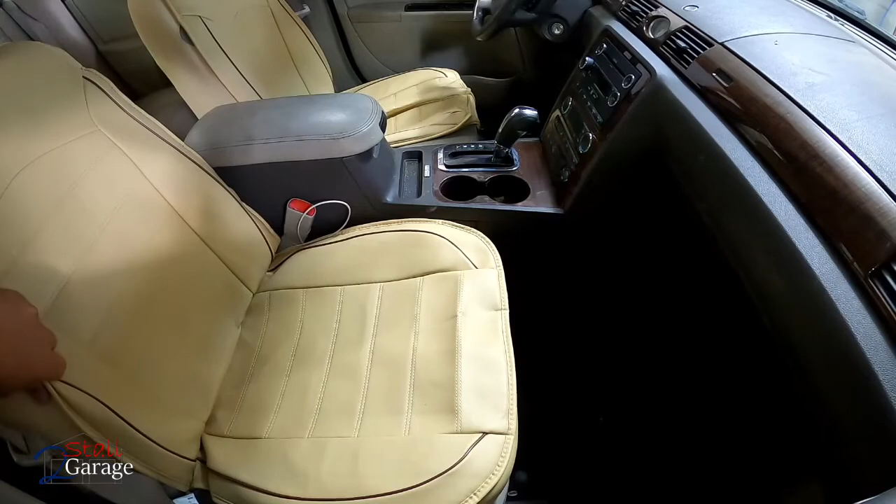The problem with these, we did a video on them and you know, they seem to be okay. They're kind of a really nice material, but they just come right off of the seat. This one here isn't anchored, that one is anchored over there, and look how it's peeling right off.

So we resorted to going to the junkyard, and guess what, we paid $63 for the seat covers in there. And for both front seat covers with heating elements, bottom and back side, we paid $14 and a little bit of change.

Well, as you've seen from the list, we got quite a bit to get done, so we're gonna get right to it. You wanna go in there, buddy? You can, here, I'll leave this back door open for you.

There you go. I was gonna do some painting on the three-wheeler. We're actually gonna do the rack here very shortly, but there's so many flies in here. I've got a zapper set up over there. And there's one, they're all over the place, more of them. So I can't paint right now. Hopefully after tonight we'll be good to go.

Let's go ahead and get the battery disconnected since we're gonna be working with the electronics a little bit under the seat. What am I doing, losing my marbles here. Battery disconnected, stay.

Pretty clean motor, clean engine bay, 225,000 miles right now, I think. Moose, I think we're gonna close this for you, okay? You can come out this side if you need to.

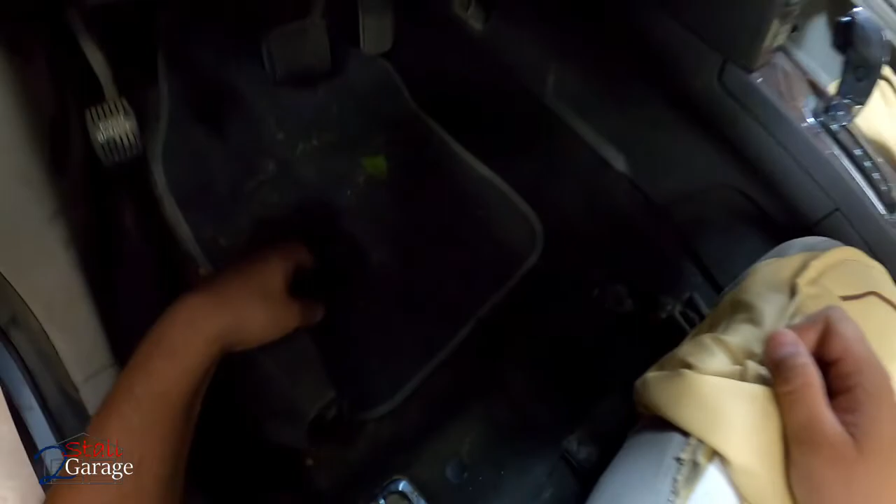Well, as you can see, it just kind of comes right off. Let's start off by taking these covers off. That one wasn't held on much, or very well. Two. Moose, maybe you'd like these seat covers, huh? These flies all getting in here.

One right there, one right here. Two, just keep these together. Let's leave this connected until we get the seats out.

At least undone. You guys probably can't tell, but the flies are all over me right now. Silly things. I think they're coming out a hole right here. It's a busted board, add that to the list of things to fix.

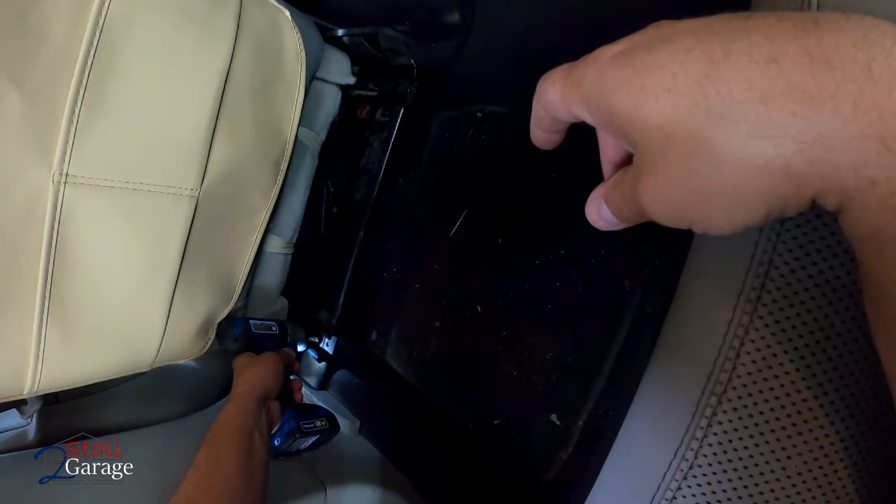One, two, leave those right there. Freed up, let's go to the other side. We'll get these first, these just kind of pull back. Separate a little bit.

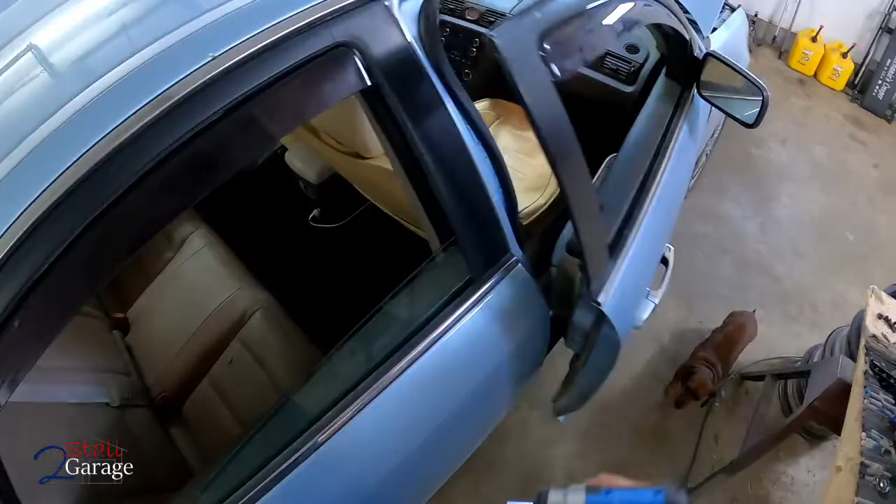One, two, forward motion. You fly, another one. This seat's got a little rip right here, but I think we're gonna try to repair that.

One, two, there we go. Garbage, there's a chip, Moose. You want it? No, Moose doesn't want it. You know it's bad. All right, now I don't know that we need to do this.

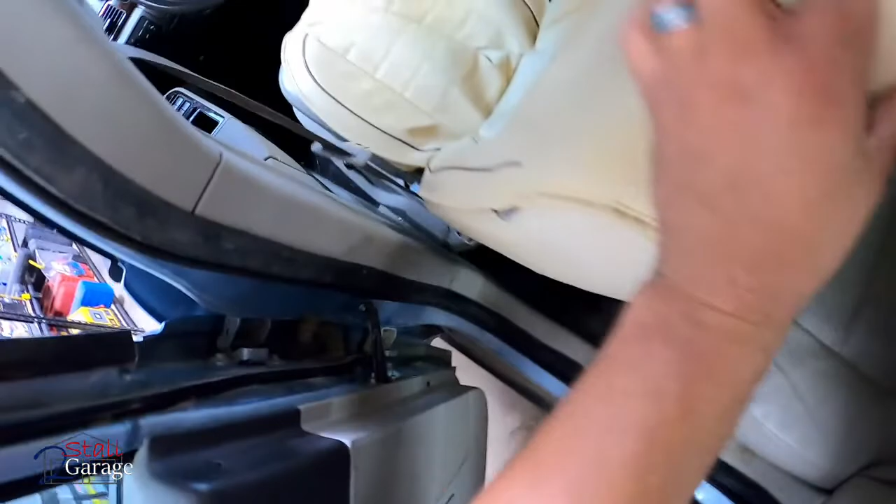But why not, we'll disconnect it. Looks like there's a pretzel down there if anybody wants it. Come on out, there we go. Lean it back, I think it's gonna have to come out this back door.

All right, so I lift this up, we got a gray plastic holder. Kind of pushes it all out right there for you. There's our big connector, there's one more little one back here.

Got that out, and now I think we're good. What's this? Phone charger. Let's make it easier, I'm gonna try to take it out the front way.

Get this out without scratching up your car door or someone else's car door. Maybe that's even more important.

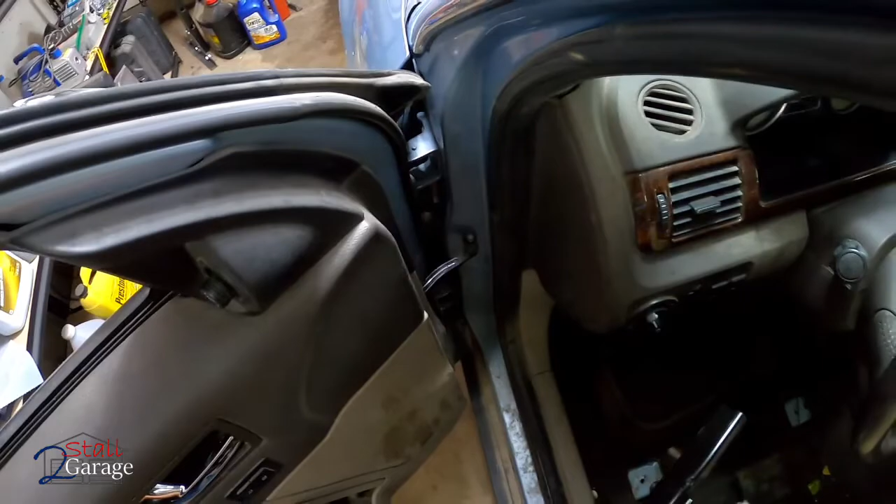Oh, that's what we forgot. One thing you gotta do is get the seat belt off. Forgot about that, let's do that. This slides up.

Fly. See if I can get it to slide up for us. Do it. There it comes, slides right up and out.

Maybe a 13 in there again. 13 or 14, what do you think? We're gonna stay with 13.

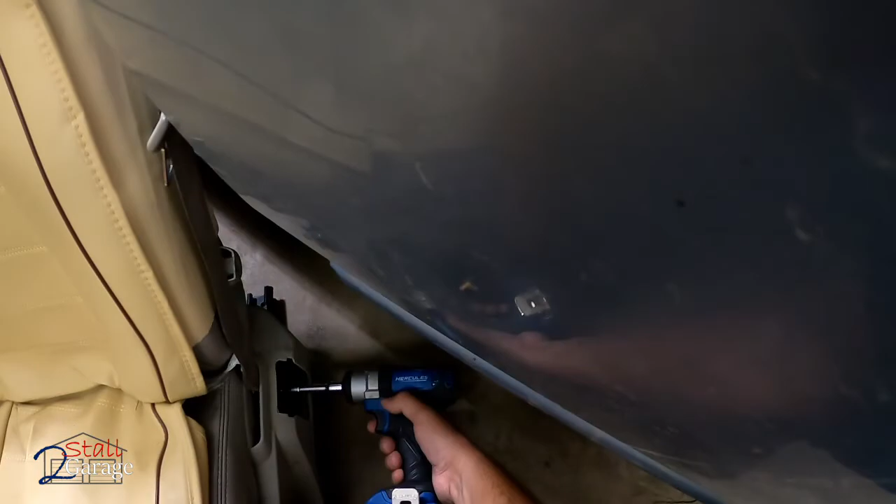Catch them, buddy, you gotta get them. They're everywhere, these flies, can't paint if I wanted to, which I do want to. Look at that, it's a 14. A little bit of a struggle bus at the moment, but it'll be okay.

This will be overkill, but we don't have a socket that's deep well on a 3/8 inch, so we're gonna have to go with the big gun.

All right, so that'll just come right off, slide out, slide up. We'll put our nut back on. There we go, put that back inside.

Stay. A little bit of a tight space in here, but not too bad. Hey, Mooser, see if we can get this on its back.

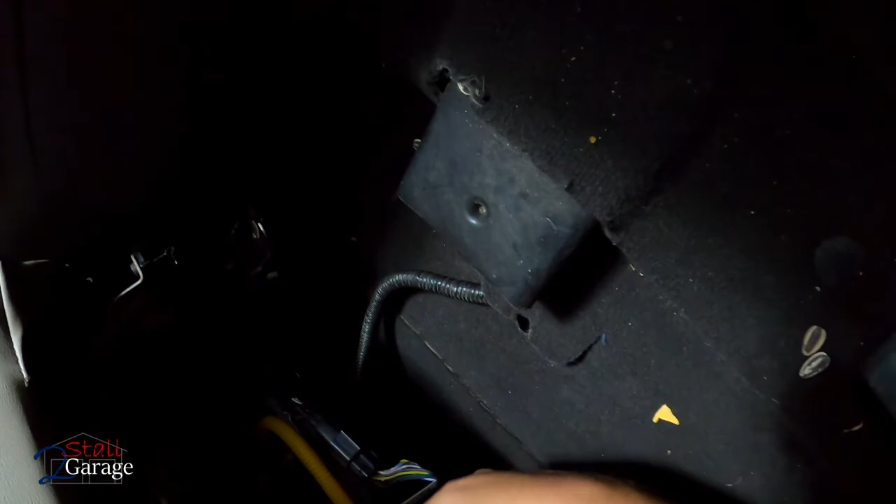There we go, you guys might be upside down, I'm not sure. This side doesn't have the same connections. Take note of that. There's another connection right underneath this gray connection right here. There's that. Got a little holder down here.

There we go, we're free. Seat belt come out. There we go, this actually has a sensor right here. If these go bad, you get an airbag light, not an engine light. So got that disconnected, got it out. There we go, it's hot, 2 air conditioners running, it's hot outside.

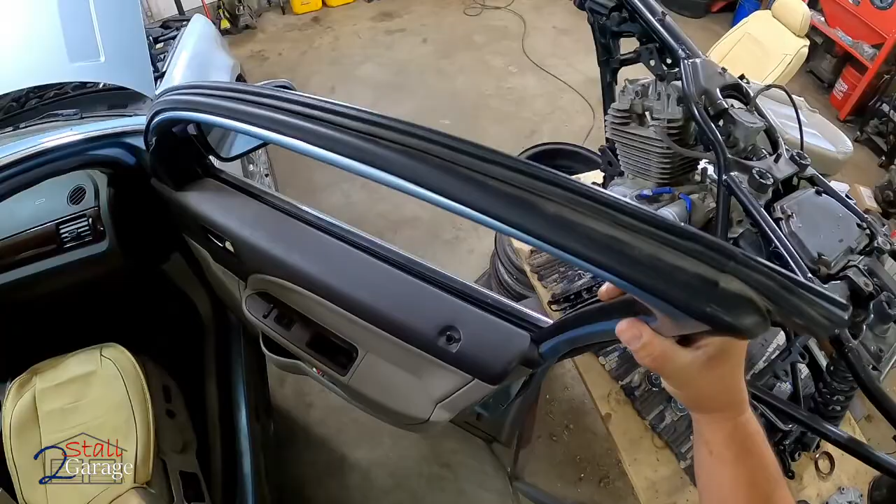All right, this is gonna be a little tighter fit. Maybe we'll try to pull it up. There we go, it's a tight fit. Seats out, connections out. This doesn't need to be in here.

All right, so there we are. We've got the passenger seat, we got the driver's seat. You can see where this is not secured down. You can see where it is, yet the sides still come up. So it's a little bit problematic.

Got a rip in this seat right here. Cushion's good. We're gonna do some flipping and flopping here, see what we're working with here. There we go, that's 1, 2.

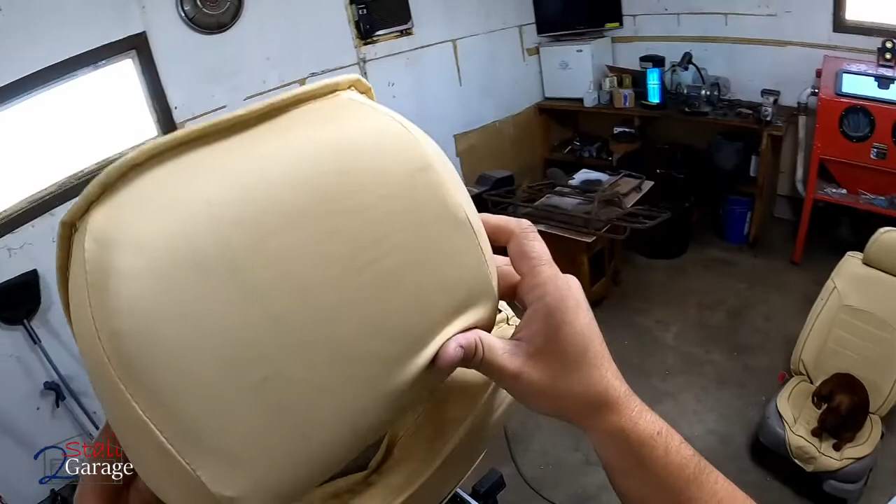Hey, there's one part done. Let's put this right in the car. And unfortunately, it kind of is what it is. Garbage time.

Nice idea, maybe a worst case scenario. I don't know what else I'd use this for. Almost like I should keep it for a seat cover. I think I could use this to recover a seat. Not that seat, obviously, but maybe like a 3-wheeler seat. Now we're just gonna toss it.

Clip. 1, it's got a little connection down here for our power seat controls. That's off. Should be another clip under here, I think. Yeah.

Can you get it without breaking it? Let's try. Get it? Got it, good. And let's see what we got right back here.

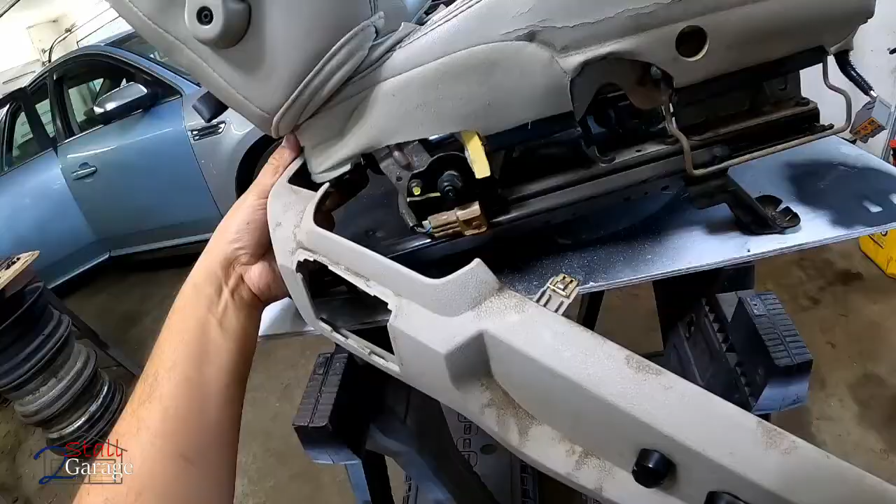Right down here, there's a Phillips, let's get that out. Itty bitty? No? There's one, you feel it? Right here. Maybe. Hey, Moose. Hey, hey.

Look at all those flies by him. 1, 2, 3, 4, 5, 6, 7, 8. I know, crazy, huh?

All right, that's off. We're gonna do one seat at a time, so I'll just put that right there. This clip was already off. Grab yourself a screwdriver. Off.

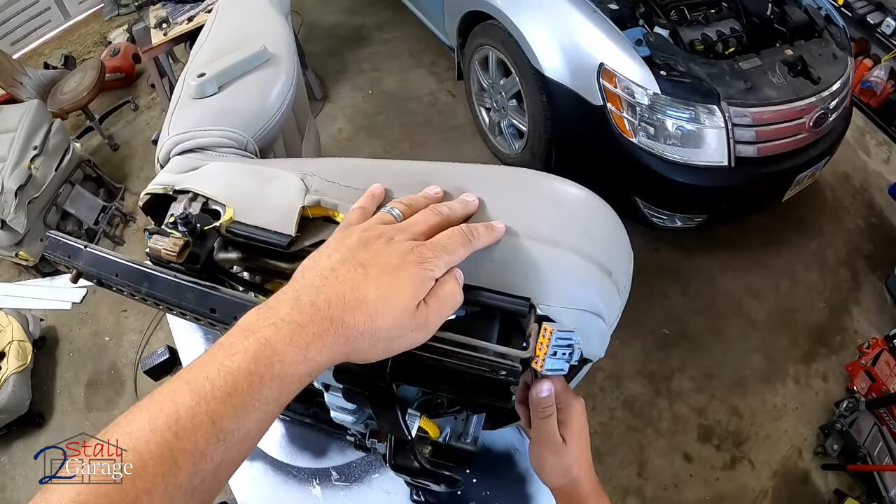Get this one. So as you can see, as I take them off, this is how you're gonna put the other one back on too. Then go right through this little hole here. Look at that, 2. Can I go through this hole now? No. Can I? Yeah, sure can.

All right, there's the third. We got another one on this side. Let's flip it around, it's starting to come off here. It's good, good stuff.

Done, this one's a little bit harder to get to. Suppose we could take off the motor, but yeah, it's just a little clip. All right, now we'll see if it comes off. You ready? Oh, right here there's gonna be some clips. Let's see if we can take a look at those. Yeah, there's one, looks like it just separate.

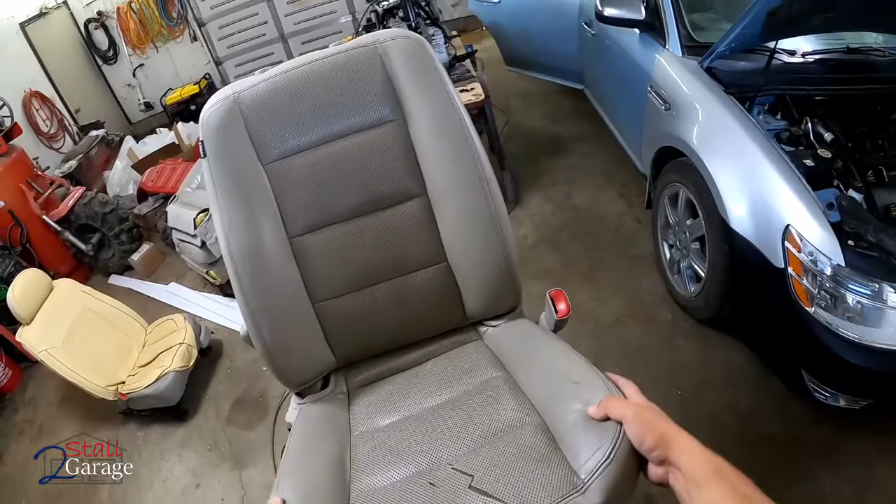One thing at a time, if you got a big list, we are not going to dispose of this foam. I think what we'll try to do is maybe see if anybody else needs the foam and get rid of it for cheap.

Looks like we've got the heated seat element under here holding on. Here it is right here coming out. And it's right here, there you go. Now we should just be able to slide it right through. Should come out.

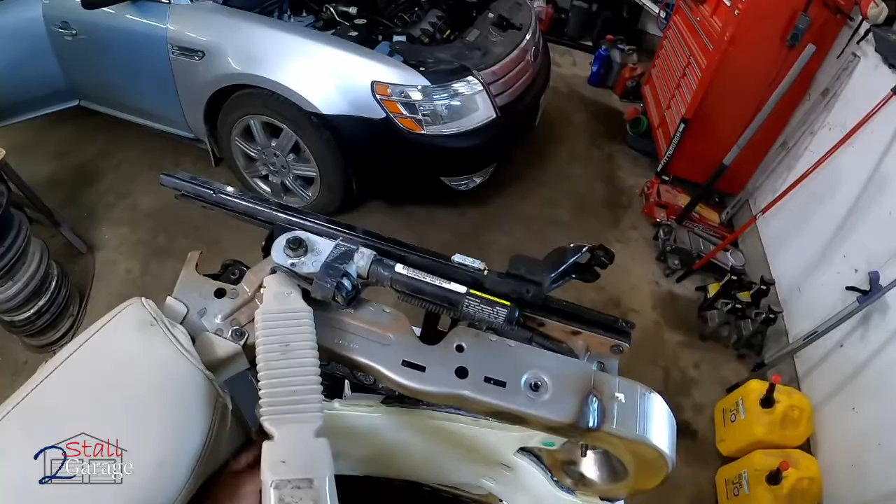So your heated seat element, here's your harness, and it is just right underneath. Just in case you're wondering, if I were to peel this back, it's gonna be right here, this white pad. But I'm not gonna peel it back, I'm gonna put it back on.

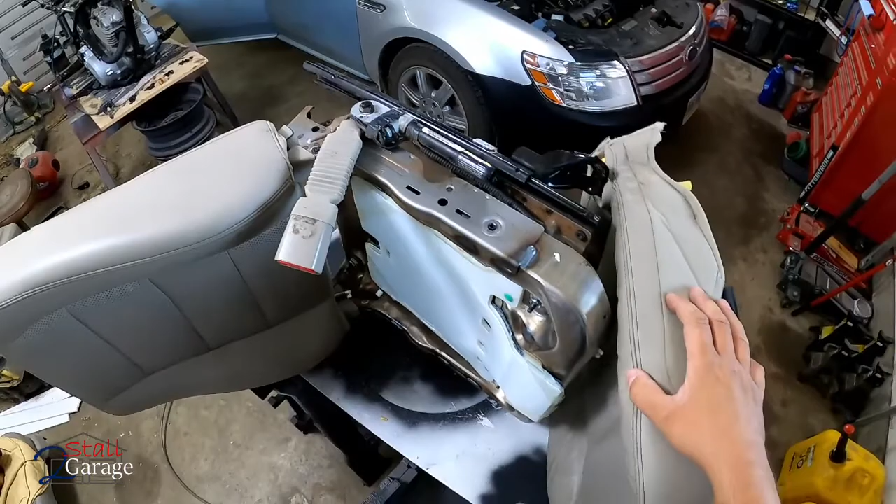There we go, I bet this is your airbag sensor, your pressure sensor. Some of you just said, yep, that's what it is. So here's gonna be your difference. Cracked up right here.

This is gonna be about $250 on eBay if you find one. The heated seat element alone is gonna be about $52, $54 with tax. So you're talking over $300, hopefully no shipping, to get the cover and the heated seat element. Doesn't include the foam if you need foam.

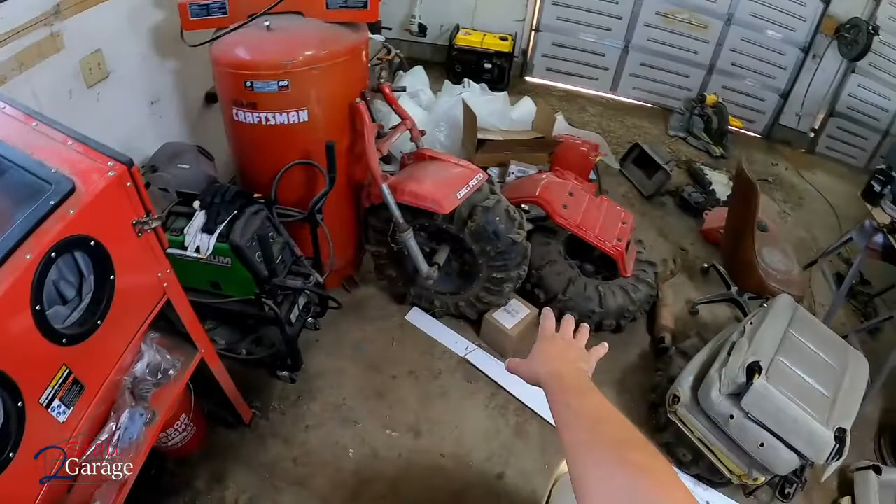Oh, I think it might have went. Boy, I just don't know. I think it came right through that spot right here. We'll try it out.

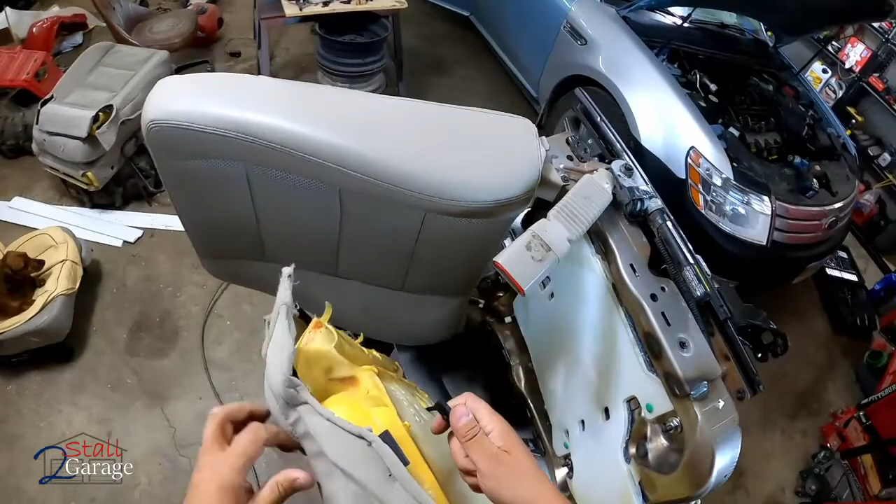Yeah, it lines up right there. So that's gonna be where we drop it in. We'll go ahead and connect it right up. There we go, and fasten it in there. Very good.

There we go. And make sure we line up. Give it a nice tug or two. You guys upside down just for a second. Oh man, is that gonna work? We'll line it up as we go.

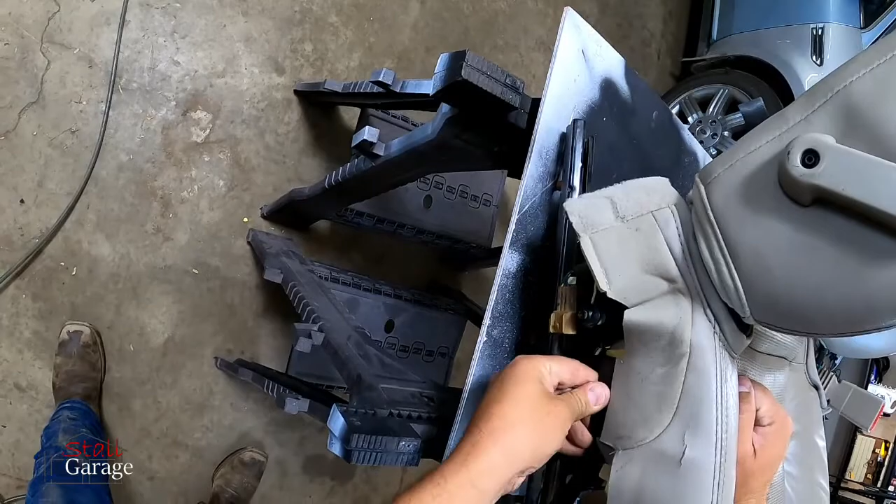What's this? Look at that. A little bit of cracking right here, but hey, it's from a junkyard. This is the part that you see. Okay, so this just comes this way.

All right, we're lined up here, lined up there. Let's get our front clipped in. I'll flip it over so we can do that without pinching the fingers, maybe.

All right, GoPro battery went dead. We got the front just about clipped in here. A bunch of different flies are hanging out watching the progress.

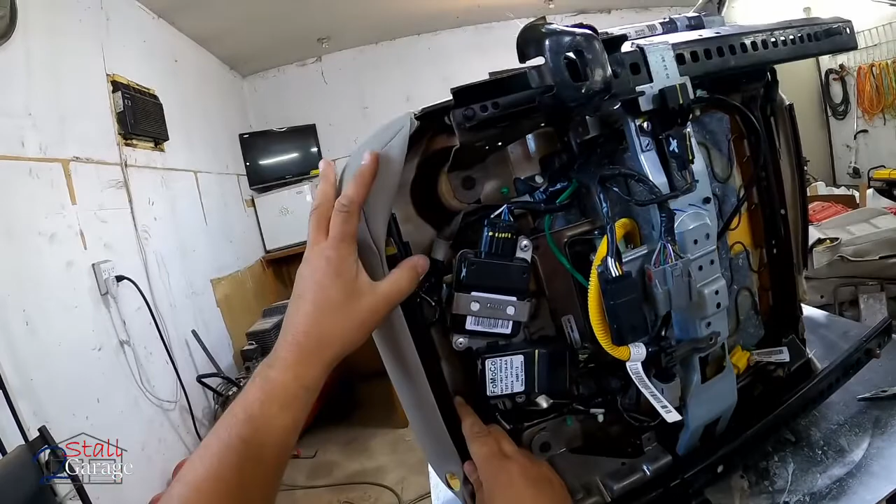Then you're gonna have to see about sliding this up just a little bit. Do it, there we go. Now we're in the middle. Small clip. See if we can get that on. There we go, it's gonna look good.

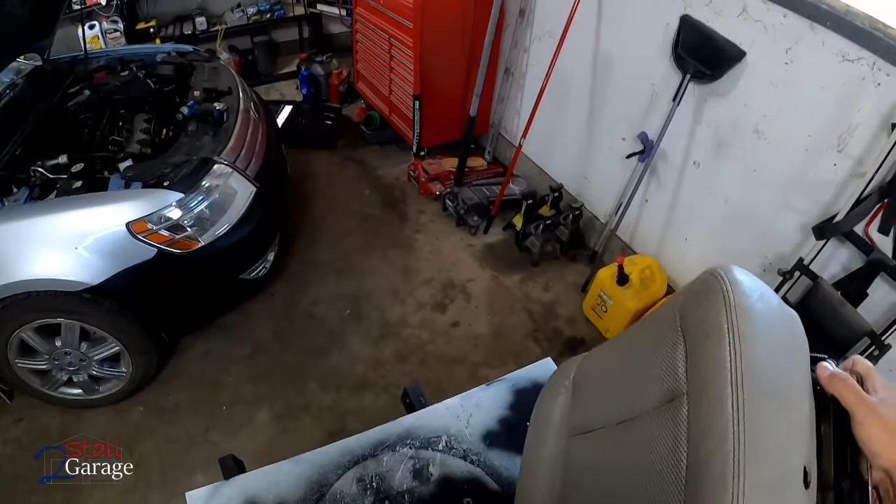I'm actually gonna flip it on its face here. Maybe we can get away with it just being like this. Let's see, all you're gonna do is try to snap these together. They came apart pretty easy, and you hope they go back together easy. And once they clip, you slide them, basically aligning them. Looks like it'll be kind of fun.

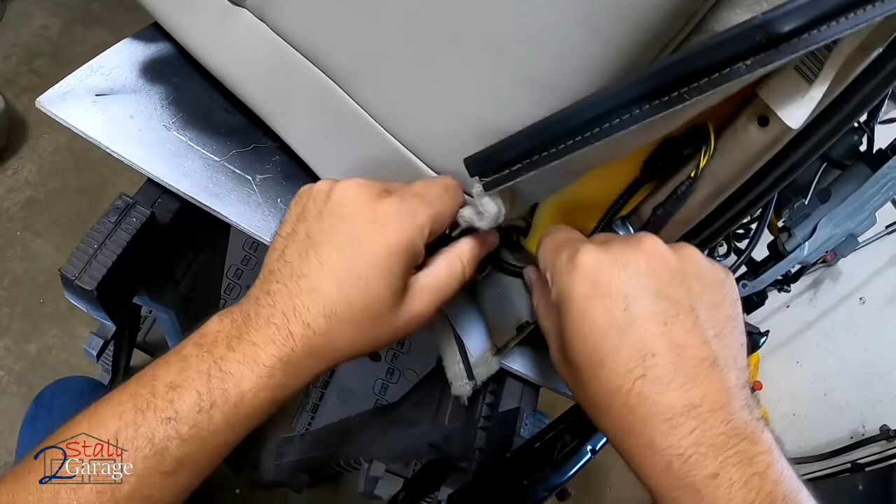Look at that, let's get this to go up here. There we go, I think that's in. Let's go for the bottom side now. You guys remember if this was covered or not? I think it is, yeah. This one's gonna be a little tighter.

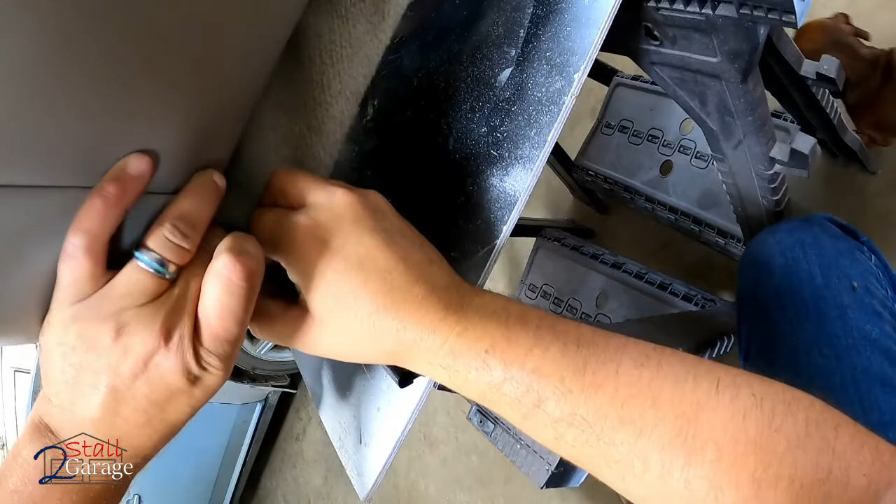We'll put this on first. Click, click, give it a nice tug. And then brace yourself. Did you get it, Moose? I don't think you did. See if we can get us just a tiny bit of slack by working it around here just a little bit.

Maybe. Boy, that is nice finger pressure. We got a click. Whew, get it? Let's make sure. Okay, let's go back a little. Look at that, it's on. Good job, oy vey.

Just like that, do a little leather conditioning. Got a nice bottom to match the back.

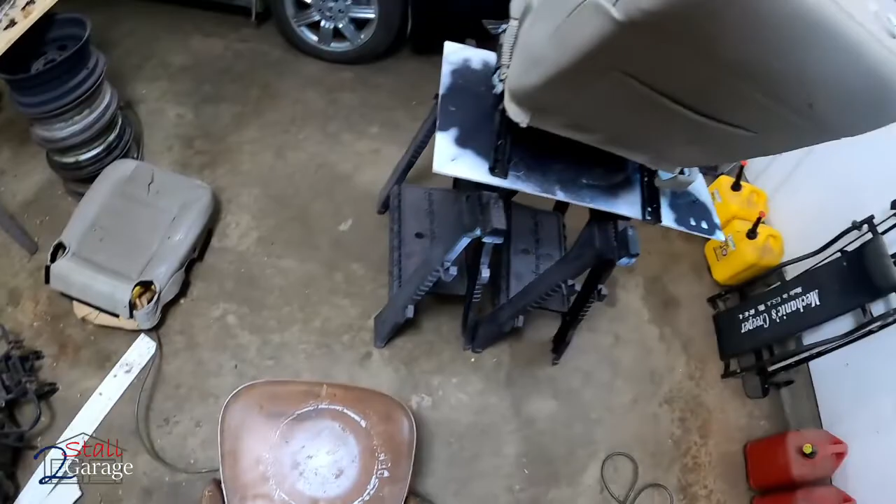Let's get this side on. Hey Mooser, I'm gonna sit down, is that okay? Holy cats, you got that thing dirty. Good thing we're getting rid of it. You got your couple clips in here.

We'll connect our fastener, see if we can get this to go on. 1, 2. Where's that? Oh, 3, get that click. We're good. Oh, another clip here. Oh, we have just got our little Phillips now.

About 20 flies in there. It's still hot outside, but they're making mad dashes for the inside already.

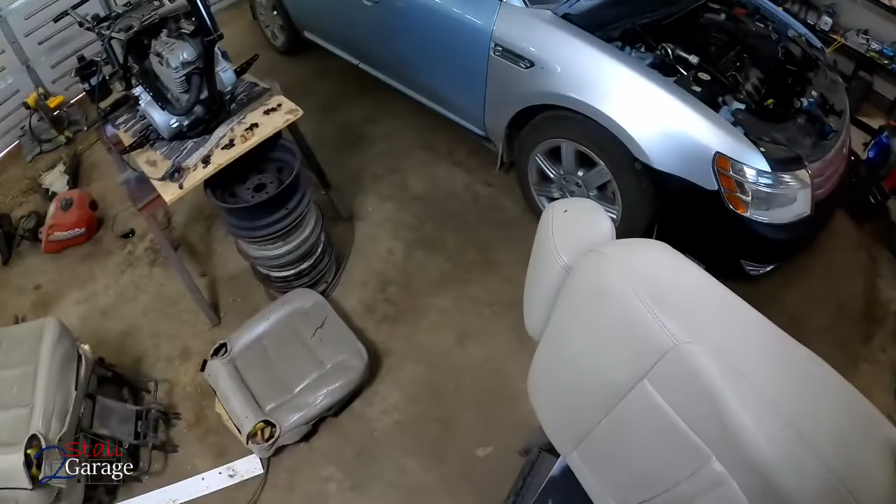Got these Mopar rally wheels to paint. These are from '71, they go on a Dodge Demon or a Dodge Dart. These are the small bolt pattern. This one was blasted on the front and back. Painted the back side of it. The front side needs to be painted the gray.

And then these are up to get blasted next and painted, but they've been sitting a while, and I don't think we can paint anything with all these flies in here, buddy.

This is gonna go right here. Hopefully you can see it. I don't know, does it go right there? Oh, it goes right here. You got these little tabs where your seats fit into, so you can't make a mistake when you're lining them up when you put them back in. What's this for?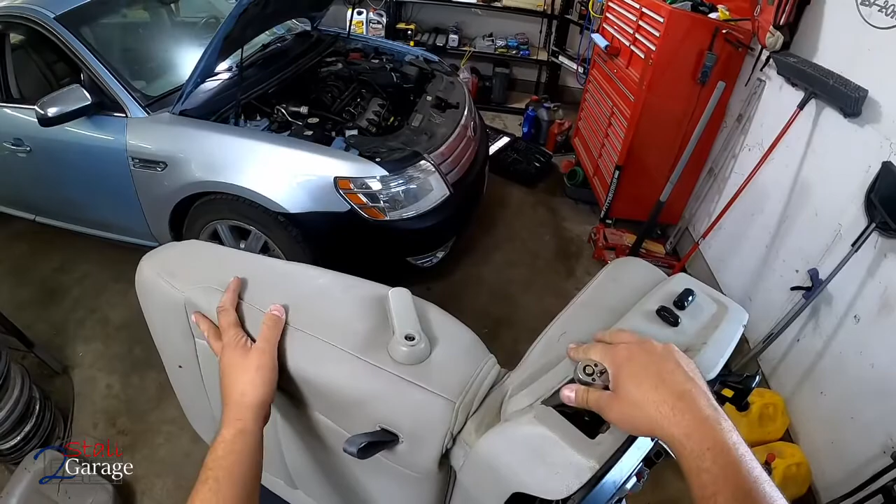Ah, it's to pull it to get out. Must be, huh? I don't really know. Okay, so this is what it looks like. Everything looks very nice on this. So that go down a little further. There we go.

Seat belt's gonna attach here. Put that cover on afterwards, and we are ready to go with this.

I'm gonna do the next seat, and then we'll fast forward to when that's done and we're putting them back in the vehicle. All right, at this point in time, I've got the passenger side seat in.

You can see here, the top had a little rip in it. The bottom had a little rip in it. Was that the case? No, correction. Just the bottom had those couple tears in there. It's the next day, so I forgot. Anyways, top's still good. This is the top that came with the car.

Got it quite a bit forward. It's all bolted down, the battery's out again. Everything looks good, needs to be cleaned up a little bit.

Hey, Mooser. This is the big part right here, the big change. This was the bottom. This is now the bottom. This foam's still gonna be pretty good. Could definitely be used again.

That top part was an extra. Might save that. See if I can get it to somebody who needs it.

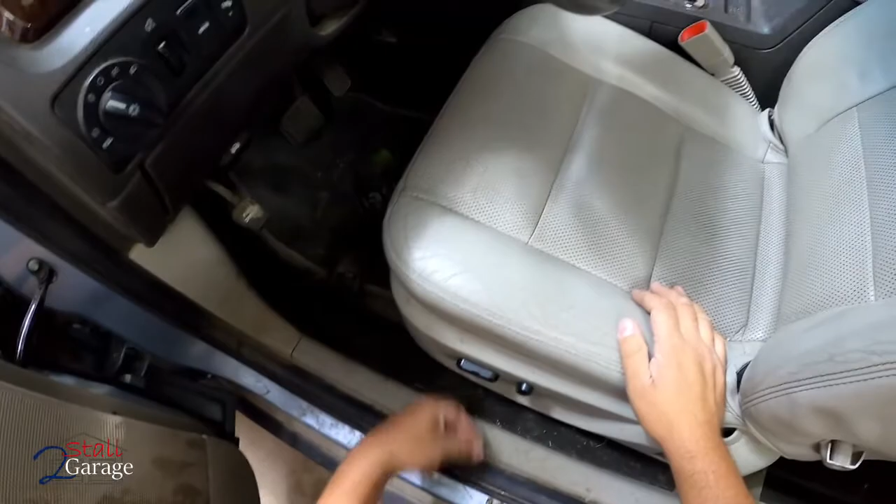I'm gonna go ahead and put the 13s in, not gonna tighten them all the way down. I tightened them all the way down on the last one and it caused a problem when I was trying to get the front ones fastened in. There we go.

Let's connect the battery up so we can move that seat. Kind of a little bit of a process. While we got this forward, let's put our seat belt connector on.

Moose loves riding in these back windows, don't you, buddy? You should do. All right, let's see if it returns. We're gonna go number 2.

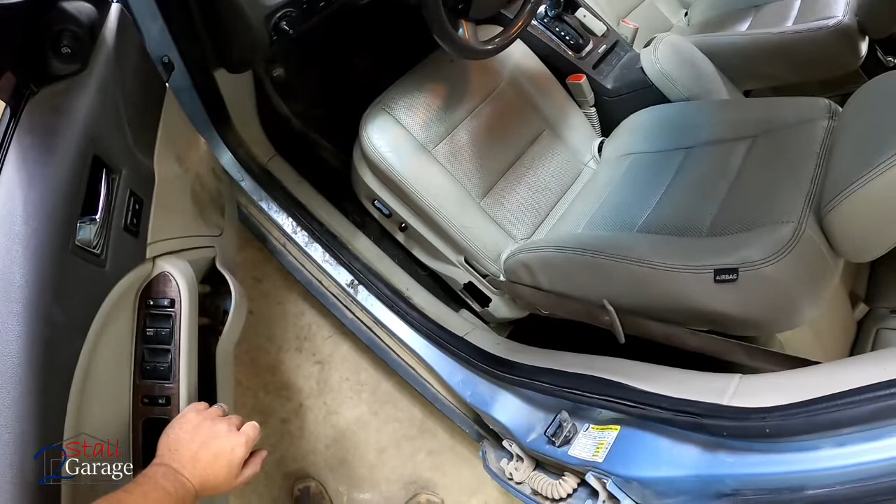I must be number 2, huh? Nope, I am number 1.

All right, now we're just gonna put this trim on. See, this one's a little bit busted right here. Thankfully, we got 3 other sliders. Put it up to it, click.

Let's move this one back. I think we're gonna take this on a trip tomorrow. Probably about a 4-hour one-way trip. It'll be nice having some seats.

So there they are for $14. What a difference it makes.

This is what we started with, just for the driver's seat. Top of the driver's seat was all ripped up too.

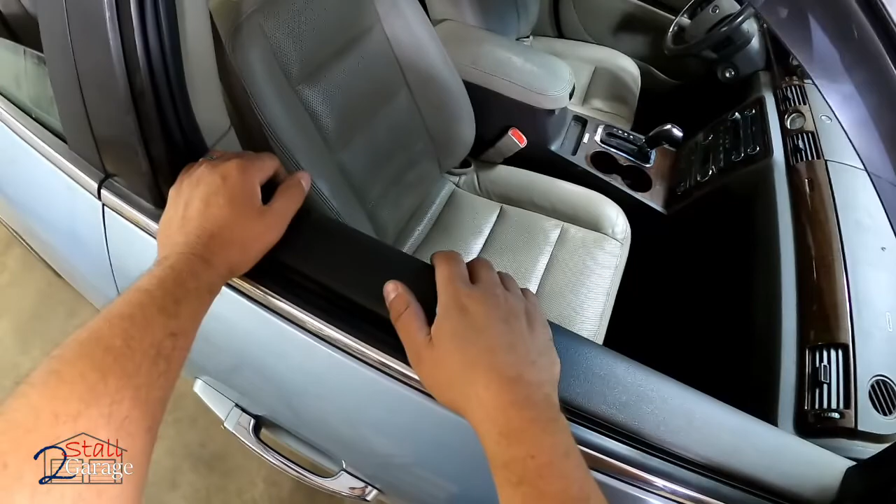This is a spare. Leather's in good shape still. $14. We went to the local junkyard. They've got a book with all the set prices and seat covers. I think they're $4 or $5 a piece. And for those luxury seat covers on eBay, I paid $52 and some change. And it's just unreal. We've got OEM seats right here.

Let's cross that off the list. Seats done. All right, I took the car outside now. We're gonna check the AC on it. Normally I'd use this gauge set right here, but I don't know where my can tap went.

Is this it? Nope. Goofy, I had this right here. I don't know where the can tap went. So I'm gonna have to use this one instead. Not a huge deal, we're just adding. I don't know that it has a leak in it. I have not vacuum checked it.

It's just kind of been this way since we've purchased it. Cool is nice going down the road, but as soon as you're idling, it struggles.

Come on, Moose, we're not staying in there. Come on.

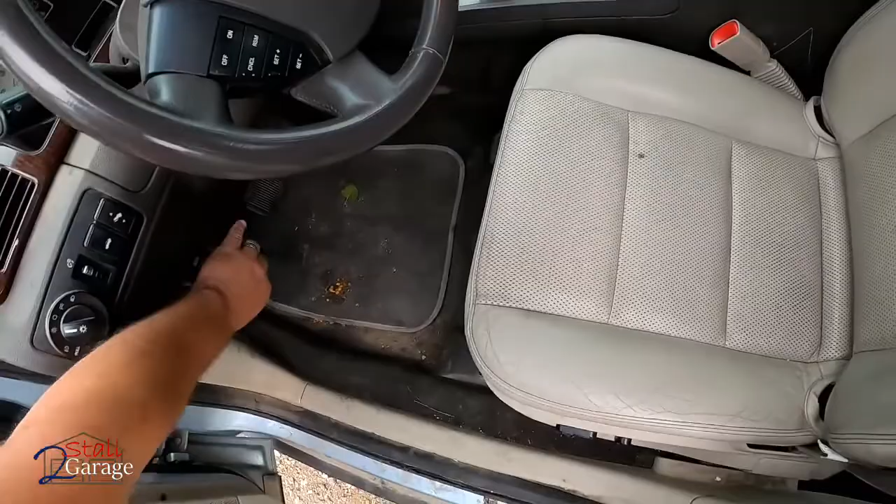Let's go all the way down. Recirculate. Turn it on high. Okay, so right now it's about 70 degrees outside. Can't believe it's this cool.

We're gonna use this one over here. It's working pretty good right now, about 48, 47. What are we coming in over here? 47, 43, 44, 45, 48, and of course that's the far vent, so that's understandable.

Come on, Moose, come. Hey, Crystal.

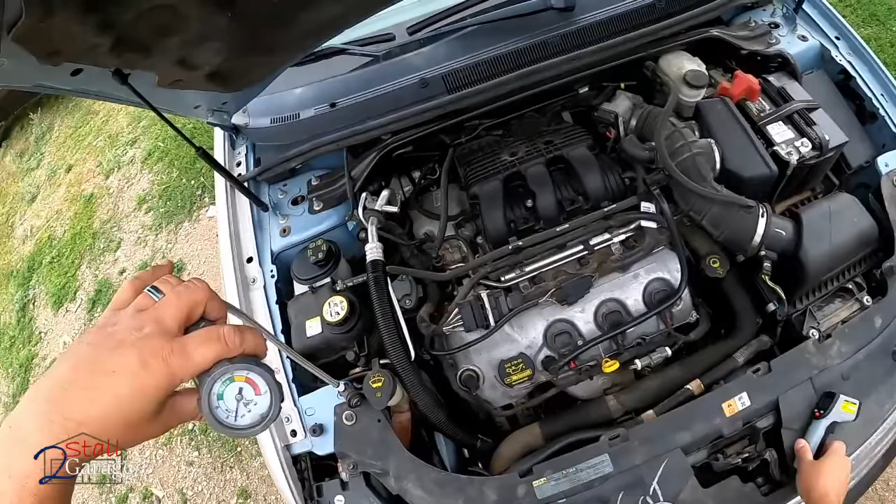Hey, kitty, kitty. Sometimes you can just put this on and you just look at this, and if it comes out to right where the 30 is or so, give or take just a little bit, that means it's gonna be low in many cases anyways.

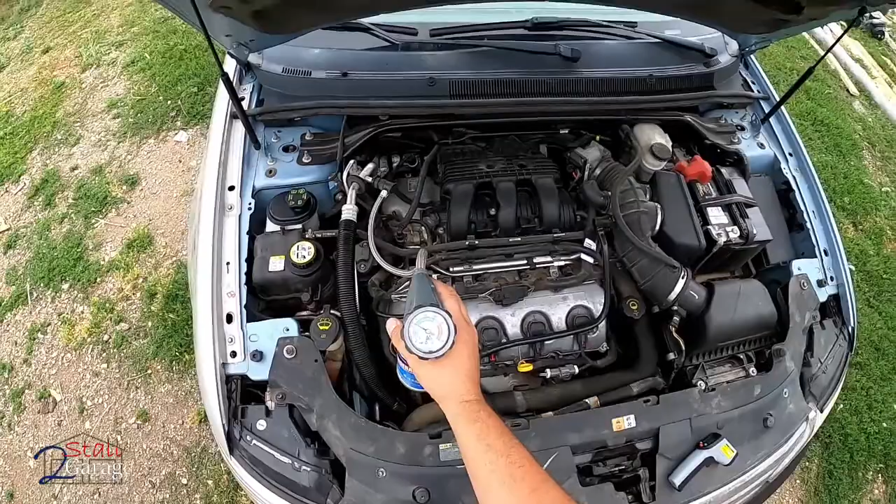One thing I gotta tell you is we're on the low pressure side right there. This would be your high pressure side. You can tell just by the fittings alone - this is gonna be a smaller one, and it's gonna be a larger one on the low pressure side.

All right, we're definitely in the green. This is gonna need more though. All right, so we were able to get it back down to where it needed to be, and now we're running 45 over here. That's a 3-degree difference from where it was.

45, 46. Keep letting it cycle here, 47.

Just take a seat in here real quick. Come on, Mooser. Come on up, buddy. Good boy. The engine's all the way warmed up right now.

I don't know if that's gonna make a difference or not, but we're still, here's 42 degrees, 41, 40, 39.

Oh, Crystal's in here now too. We're almost out of fuel, I see. 38. So we're gonna call that a win.

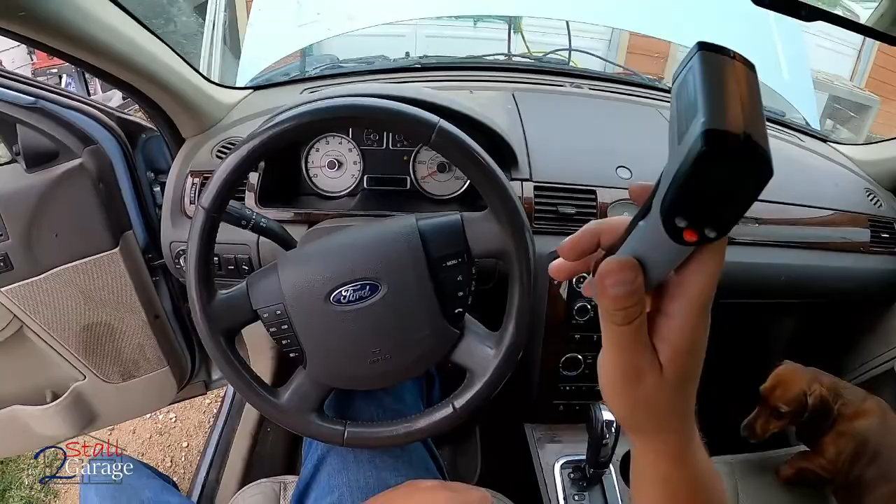This went from about 43, 44 to 38. This went from about 49, 48 to, what was that one, 46, 45.

What do we got right here? 38 again. All right, capped off, calling that done.

All right, we're still doing good. 43 was our last reading for the far vent. Good job, Moose. Okay, now that we've got the AC done, we're gonna go outside.

These are 18s or 19s, and we're gonna take the tires off. We're just gonna take the wheels off as a whole, and that's gonna resolve. There's a few things on this list, but that's gonna resolve the tire vibration, ideally.

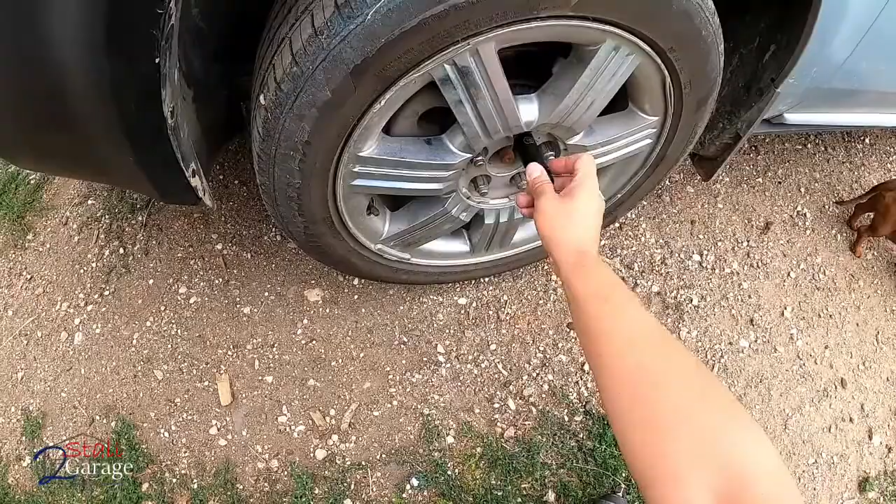By that resolving it, I mean what it's gonna do is, we just got these balanced not long ago, but we live on gravel, so we tend to get some buildup. There's gonna be 19s. We're gonna take the two fronts off.

We're gonna power wash the backs of them. We'll check and see if they got mud on them.

This one looks good. Doesn't look like it has any mud on it, so we're gonna put this one right back on. There's no reason to power wash it off if it doesn't have anything like that.

Must be a different tire. Took these caps off, the hubcaps.

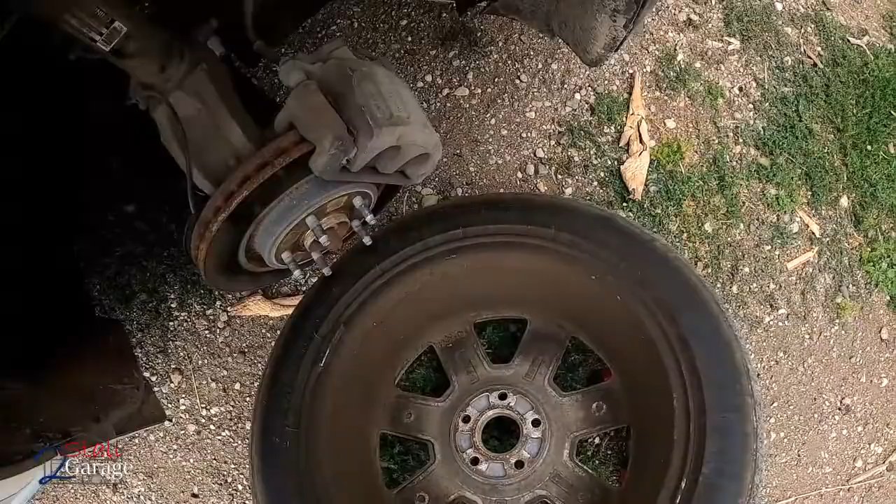This one's dirty. We're gonna wash this off. This is caked. Let's throw that right there for the moment. Let's go ahead and see if this cleans up.

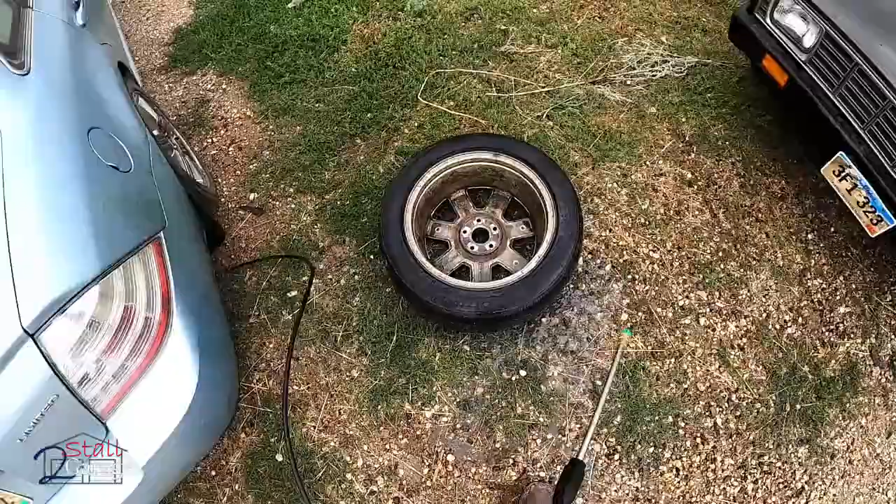All right, one down. Let's grab the next. Let's put these on the front again. Guys are all over. Don't go under.

Yeah, it's not a safe place to be, Brownie. Turn it on to one.

Oh, gotta put this on first. Here we go. There we go. These don't fit tight. I don't know why they just don't.

All right, here we are at the back. Let's see what we got going on.

Whew. Oh, I hear Chief in the garage. That's not good.

A lot of mud and dirt in there. Let's get that washed up. Front tires are cleaned off.

This one was good. All the rest of them needed cleaning. This one had some pretty good mud on it. The far passenger side had a bunch.

Hopefully that resolves the vibration issue. Hopefully everything else is still in alignment. We're gonna call that check.

All right, we'll put our torque wrench back. It's a 19-millimeter socket back, 18-millimeter socket back. We're missing these, we never had them. We're gonna try to get them at some point, the ones that are gone.

All right, let's go ahead and get this vibration out of here. Get the AC out of here as well. These are just for the videos.

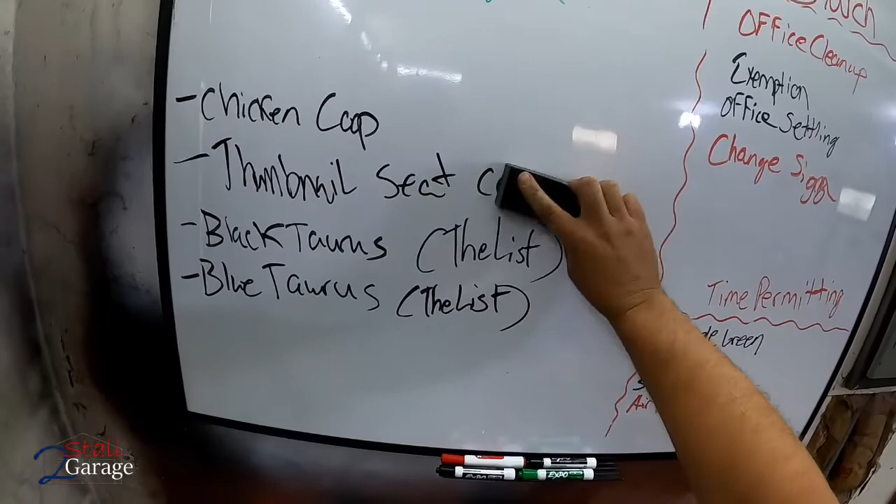We got the blue Taurus, the list, black Taurus, the list. We're gonna update that. Let's call that done, actually. Let's go ahead and add.

See, I told you we're gonna get to a three-wheeler over there. Silly flies, that one's going, that one's still going.

I think we're good to try to do some painting today. So we're gonna add, what do we have left on the list for today? We got the clicking noise.

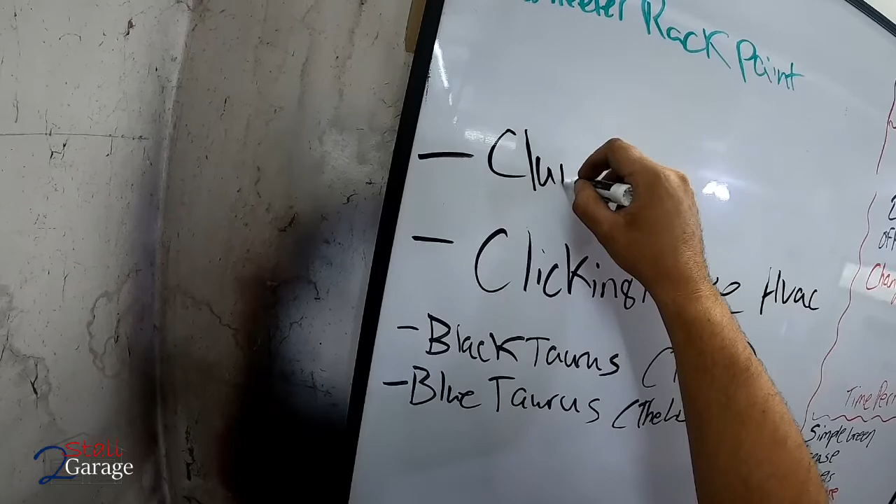Clicking noise, that's for the HVAC. And then we've got clunking - I'm gonna need Julie's help for that. Clunking while turning. Is there anything else on that list?

All right, now that the tires are done, let's move on to the air conditioning, the clicking sound. Hopefully this is gonna be pretty easy to do. Definitely causes a problem. So we're in here.

Check out those nice seats. Look at that. Look at that seat. I can't believe it. This thing's gonna clean up so nice. It's got lots of miles on it.

Do you think we should put a timing kit into it or not? Let me know what your thoughts are. See if I can get that to stay there. How about, huh? Think it will? Maybe. All right, so let's take this.

Oh my, what's that go to? Anybody know? Let's see here. Oh, I bet it goes to that right there. Let's go ahead and take that down.

Look at this. What is that? What's happening there? Right up in here we can see we've got the actuator. Let's see if this is the one that's clicking. I can tell you right now that it is.

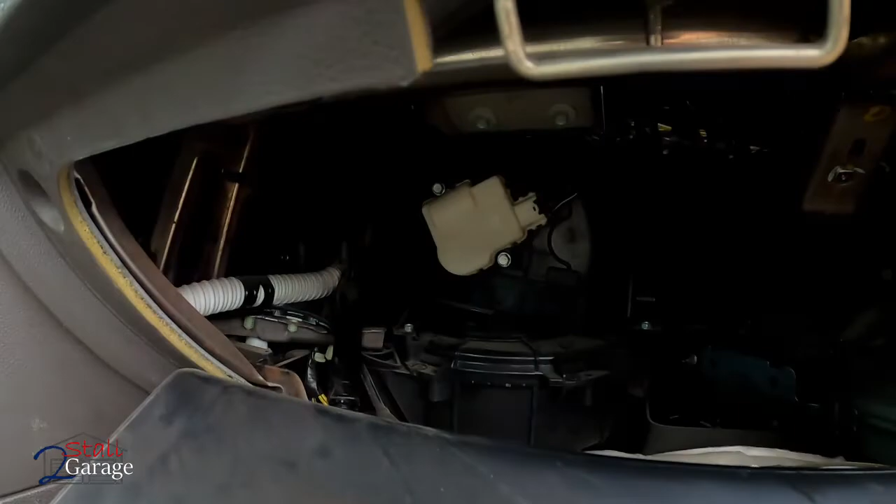You can hear it and feel it. Looks like a couple of 8s. Yeah, that's going to be your recirculation actuator, I believe.

Let's turn the key off over here. Look at that. All right, I'll be right back. I'm going to use a little extension.

If you got this clicking sound going on, it's going to affect your HVAC's performance, like your AC specifically. Don't be afraid about going after something like this. How simple to just get this out. Shouldn't be an expensive part. I'll let you know as soon as I find out.

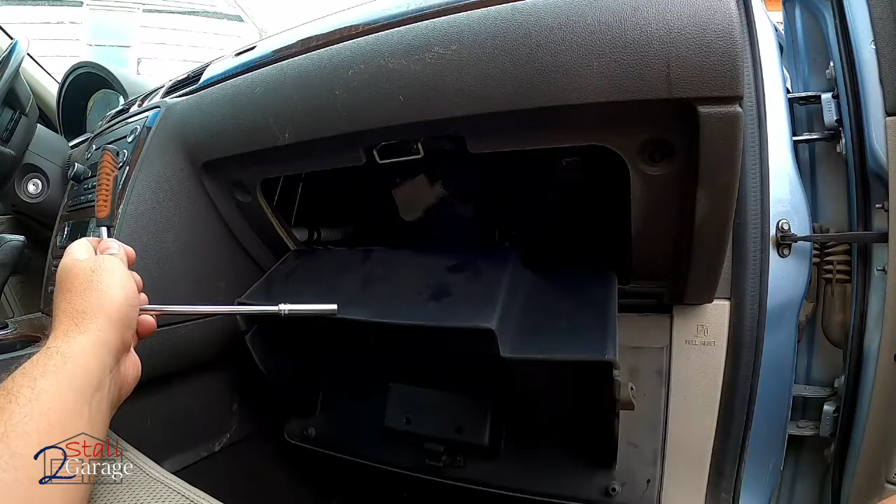There's one. We got two holding it in, and it should go in the exact same way it comes out, as far as the actuator arm. I'm not sure exactly what I'm trying to say, but maybe you know. Anyways, when you put it in, it should fall right into place where it's supposed to be.

And there's a second one. So we just got these right here. Leave those. This actually doesn't look like it's necessarily broken. So I think that, oh yeah, it just slides in. Let's see if we can fix this right now here while we're getting attacked by flies.

We're gonna put this up for now because we're gonna drive this into town and get the part. So I won't show you that, but when I'm back, we'll have a new piece. Quick little trip, and by quick, I mean it's more than half an hour in, more than half an hour back. So hopefully this is the right part. It looks like the right part. These are not expensive, thankfully.

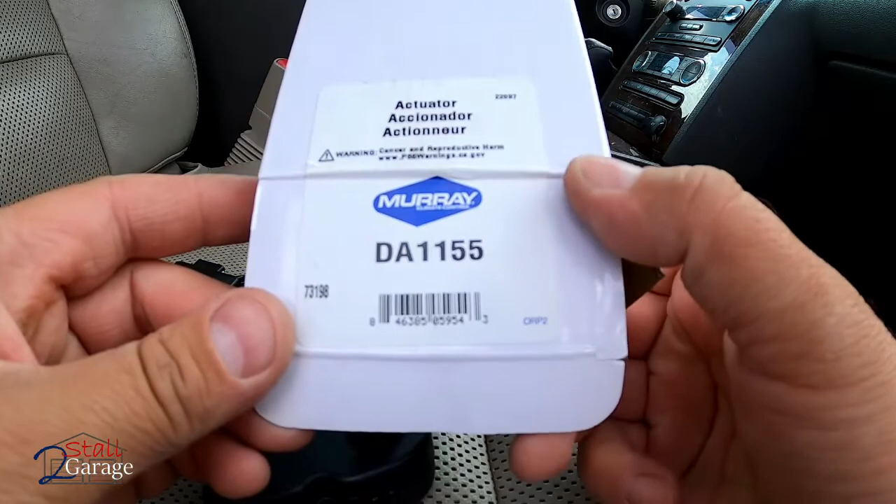This is DA 1155 by Murray. Do a little comparing here. This is the old, this is the new. Looks good.

We're going to take this one apart in the next video, or in a video that's coming up perhaps. Now we're hoping that this isn't bound up or anything like that. There are times when this stuff can break because there's an obstruction in there. And I'm going to see if I can just maybe manually turn it.

I don't know if that's a good idea. It's probably not. There we go, it's not bound up. I can feel it turning. It's a good sign. Let's get these started. Don't drop them.

That one started. Next one's just right up on top here. Oh boy, don't drop it. Get in there. Oh man, that's close, huh? Camera's kind of in the way just a little bit. Let's try again here. I'm gonna have to take the extension off there and just try it this way.

It is so nice that they made this accessible. A bunch of flies traveled into town with me. That's nice. At least I got out of the garage.

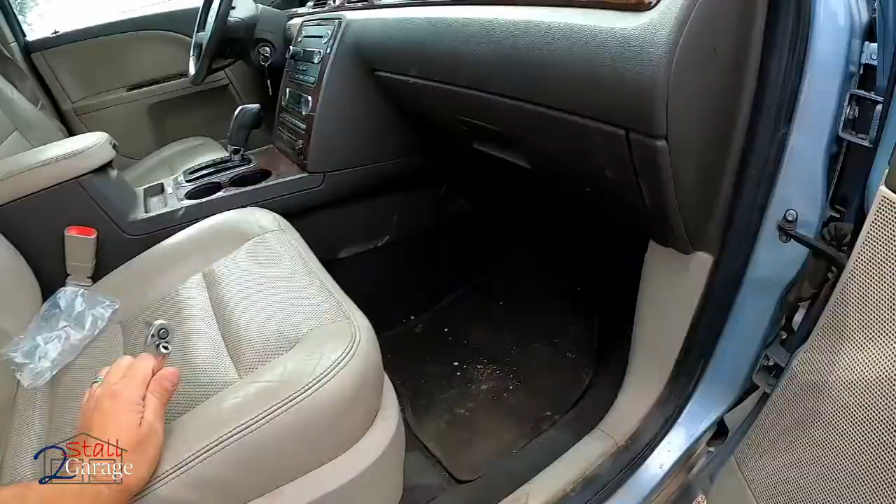Mooser man, what are you doing with that sock? Oh boy, there's the Chief and Philly. These are our prize 2 chickens. Hey Chief, come here buddy. Buck, buck, buck, buck. Philly. Be nice, Philly.

This part was about $25. All right, so let's go ahead and get these off. What happens under here is this has got some play. Let me see if I can get down here and show you.

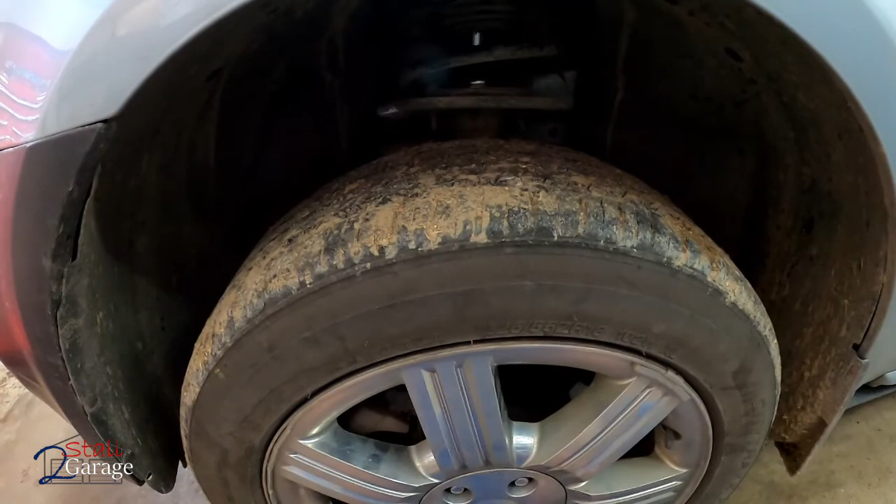And where it's happening is right up here at the mount for the spring. Can you see that? Maybe you can hear it, you probably can't see it. What's happening is there's a bearing up here, and the bearing has got some spaces in there between the bearings, and when you turn right or left, whether it's a little bit or a lot, you can end up hitting that spot, and it should be smooth all the way around, but it's not.

So with that said, we're going to pop this driver's side tire off. We're going to go ahead and take the passenger side tire off as well, but we'll do this one first, and we want to eliminate the clunking going on here.

Underneath the car we got 2 jack stands, one's on each side, then we got the actual floor jack right in the middle. Let's come here and pop our hood.

Hey Mooser, you think someone's here? I don't think so.

Pretty clean engine bay. It's actually, it looks a little better because there's a transmission fluid leak happening. We got to take care of that sometime. It leaks out and starts to come up into the engine bay and kind of make everything look pretty. All right, right here we just got the speed sensor.

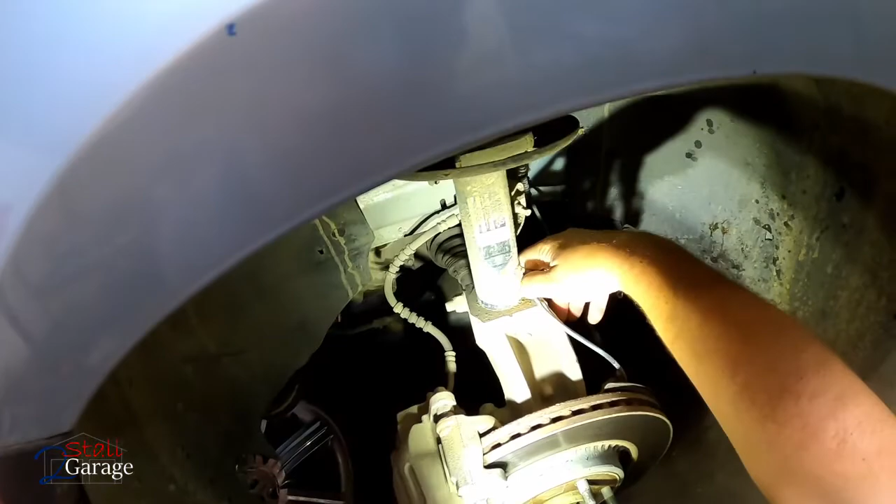Yes, I need 2 hands for this. All right, speed sensor's off. Okay, we got a 15.

Come on, you're just spinning, aren't you? Yeah, that's spinning. Get this with the little WD-40. And unfortunately, I don't have an 18 wrench. You believe that? This is working though. We're gonna be okay, sorry if you couldn't see.

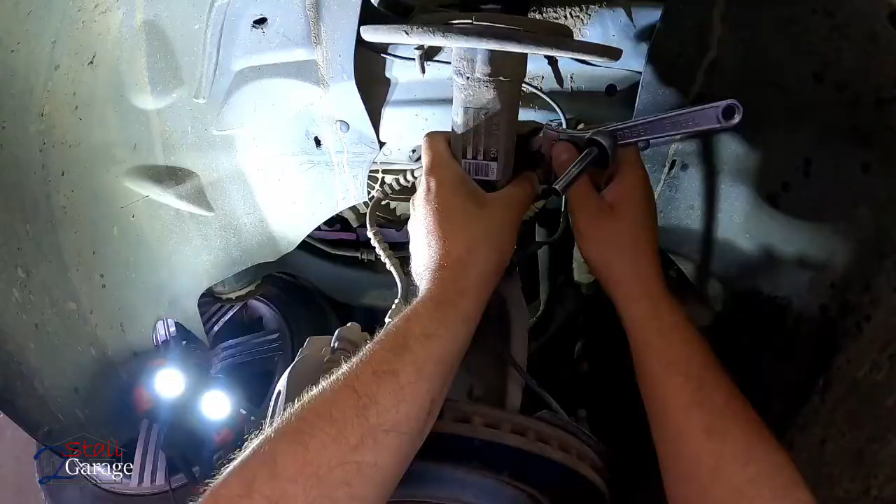Trying here. This would be a whole lot easier if I just had an 18 metric, huh? But we're gonna get it one way or another. I can't stand crescent wrenches. Stay. Add the 18 millimeter metric to the list.

It'd be a whole lot easier if you just let go, man. It's trying, it's slowly coming. Can you guys even see what I'm doing? I don't know, maybe, probably not. Something that should be so easy is just a little bit more complicated than you asked for.

Ay caramba. Silly, I'm gonna get a wrench here. We're gonna turn it like this and hold that. Stand by. Come on, baby, let go. There we go, woo, got it. Maybe. What do you guys think? Who really knows? Crescent wrenches.

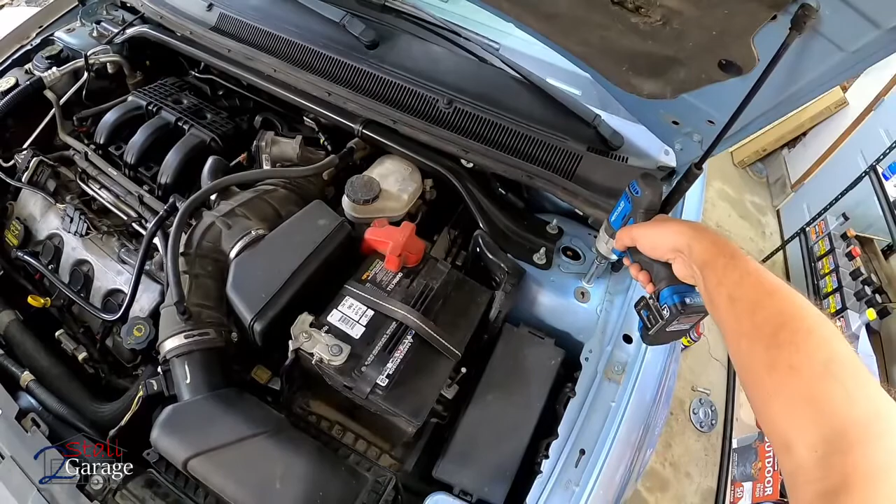And as you can see, it released down. Just gonna come up enough. Maybe we're gonna disconnect right here on this crossbar. Let's grab this side, this is the passenger side.

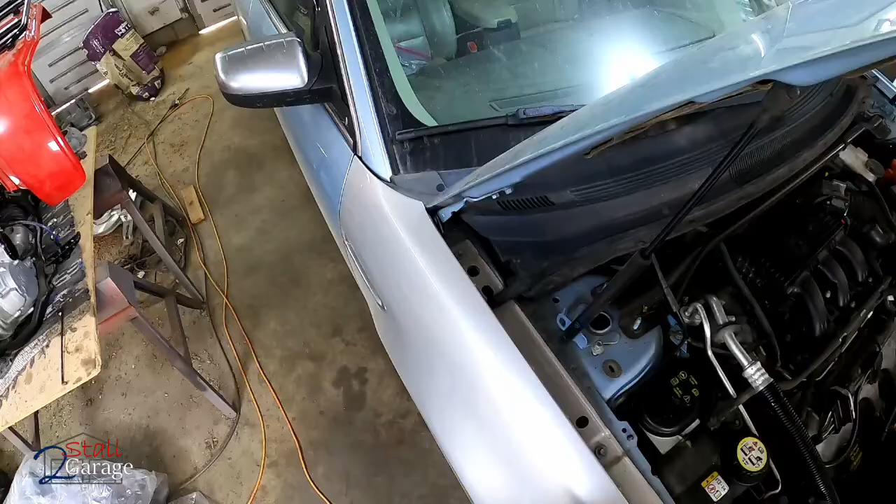Just gonna leave this one on. The rest of these we're gonna place right here. Oh, just take that off for now.

I'm gonna have to take off the tie rod and the axle to swing it forward. Just kind of is what it is. I won't adjust them if I don't have to. Looks like the tie rod nut's 21.

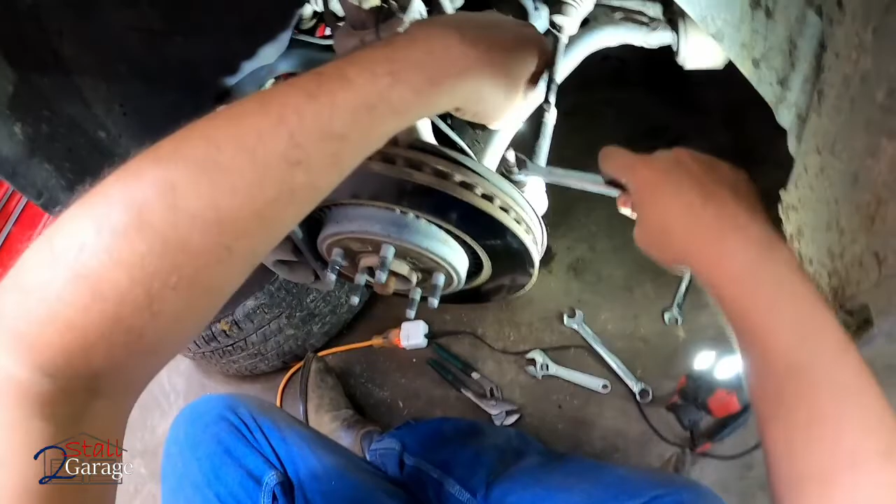Got a spinner there too. Well, I think we've got a 21, so that'll be okay. All right, so right down here is the nut. It's a 10. Put the Mighty Hercules on there, see what happens.

Oh, looks like it just likes to strip. That's not good. A 9? It's not a 9. WD-40 time.

Go see what else we got a WD-40 on. How about the axle nut? All right, after bringing all the tools out, I got this 10, it's an impact 10. Got to figure out which way I'm supposed to go here. This way.

And I hope you can see that we're getting somewhere. I believe we're getting somewhere. Yep, all right, let's see if I can move this. This baby is tough. Man, oh man. Do a little back and forth action. Oops, that slipped.

We're getting there. Looking back, I should have just left this, taken these off, taken the axle bearing out, or the axle nut off. But I was trying to do it the easy way, and that doesn't work all the time. Starting to feel some light at the end of the tunnel here, a little bit anyways. I know we're squishing on our dust plate, but don't worry about that for now. Just want to get this off without having to cut anything.

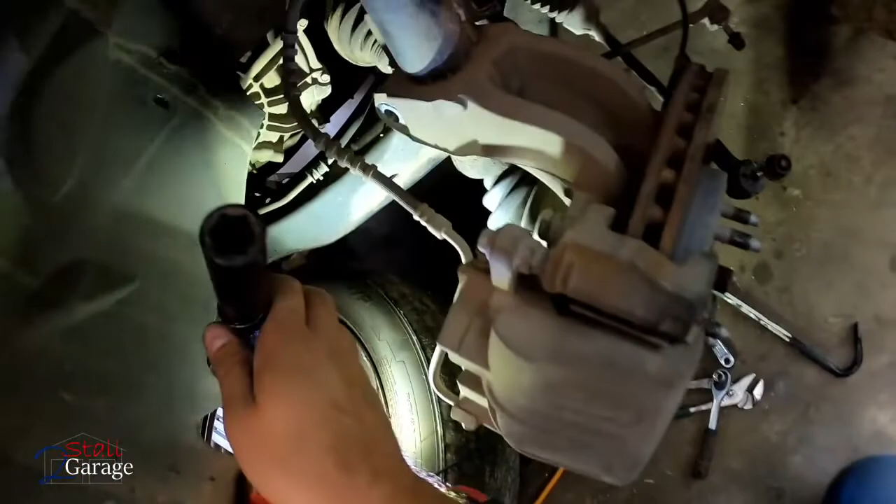All right, so it's gonna be an 18 to take the caliper bolts off. This is the one that attaches right to the knuckle. All right, ready? Watch your brake line.

One down. Oh, grilled ya. Two. All right, here you go.

You ready? Let's get our axle nut off, it's a 32. Maybe we'll get it off, huh? Whew, but that's hot. Not too bad, good thing we put a little stuff on there.

These don't look crusty, at least right here, but you got any more? I usually don't even put those back in, more problems than anything. What'd you guys do to that?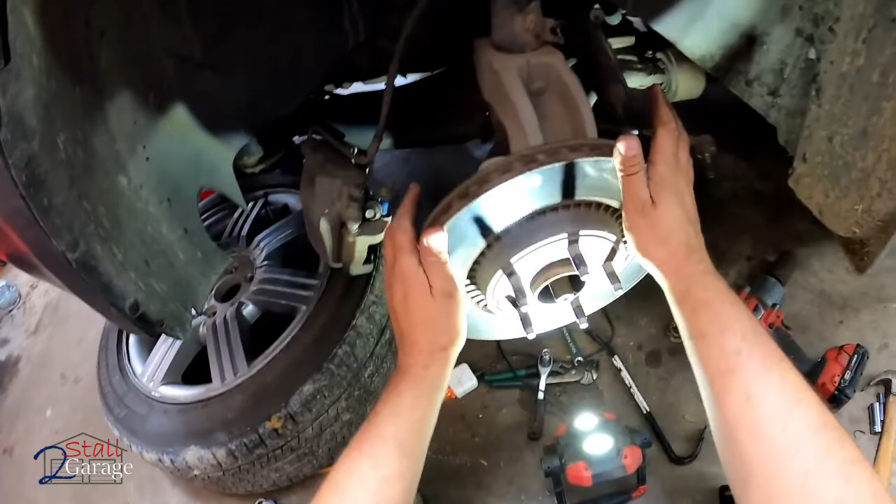Wish I had better lighting for you guys. Uh-oh, what's the deal? Oh, battery came out, look at that. It's broken.

Well, that didn't work, next. Looks like this battery's got to go in the garbage, busted. All right, another reason to leave these on, or leave these, you know what I'm saying, right?

That did not work. That's not good, it's stripping already, boys and girls. Are you ready for this? Got two problems, this isn't looking very great, and that's not looking great.

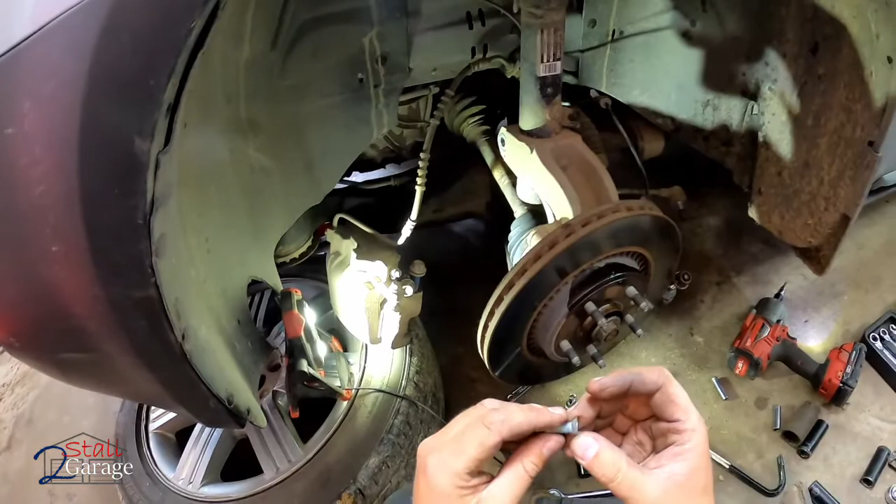Ooh, we got lucky. Whew, well if we put that one in, we're putting Loctite, the opposite of Loctite on it, some grease. Anti-seize, there we go.

There we go, sorry for all the loud noises. See, it's pretty rusty back there. Those are gonna go on temporarily. Got a new set sitting out back.

That's loose, good. Don't ask me why I'm doing this. It's just because I usually kick stuff underneath the shelving back here. This way they don't get kicked, huh?

Well, what do you guys think? Suppose we got to put this tie rod end back in there so we can get some torque going. All right, boy, that is nasty. That's all we need, just hold a little bit. That should do. Yeah, I think that'll do it.

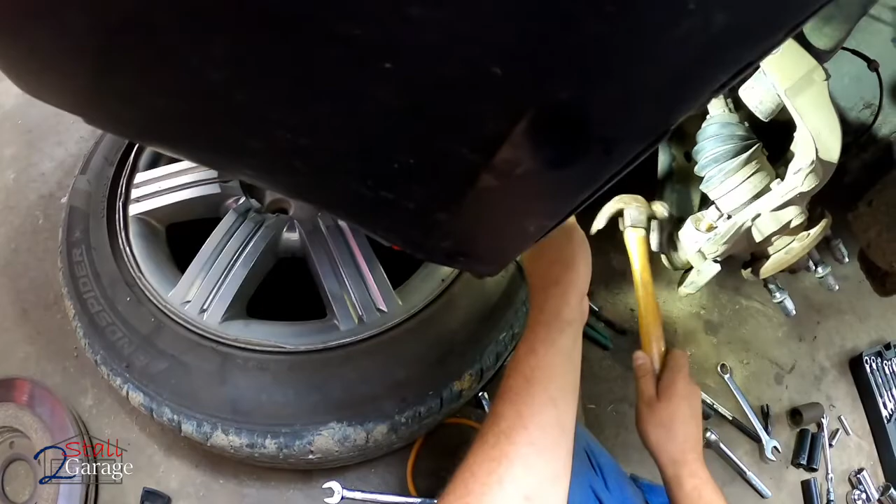Okay, battery went dead, so I switched it real quick. Just used the 21 metric, and then the 10 metric, and I was able to get this bolt off. So let's get this bad boy off now, see if we can get this to fall down.

That's probably not gonna go down anymore. So all right, I finally got the strut tower mount to line up those 4 bolts. And then what I did is on the very top, I took one nut, zipped it all the way down real quick, so that way it lifted the tower up along with the knuckle.

And now I am just going to try to get this knuckle to separate from the lower ball joint. And I'm going to use the little handy dandy thingamabobbo and see if we can get that done.

Okay, so I just about got it out here. I'm pushing down on it. Remember, I got 2 jack stands underneath this and a jack. Watch your... everything.

Oh, all right, got it out. Let's go ahead and remove this axle nut. Oops, we're making progress at least. All right, that's out now, hopefully.

Okay, let's take that out. This is our speed sensor. Oh yeah, I took the dust shield off just so you guys know. And for that to happen, these little bolts busted when I took that dust shield off. Hopefully these do not bust. They do not feel the best.

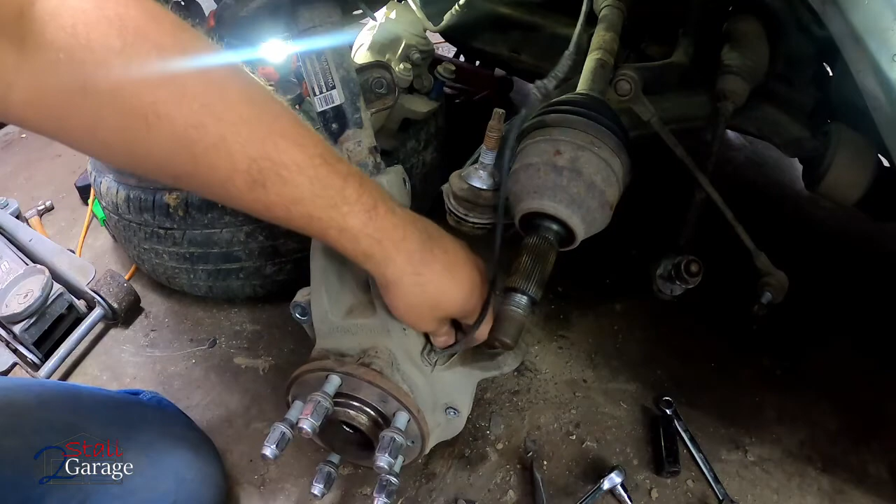All right, there it is. Set that off to the side. All right, here's what we're looking at. I'm gonna go get the other ones out of the box real quick. Be right back. Okay, here's where we're at. Here's the new one.

I have a feeling since I whack-a-moled it up here, I made it expand. So this is on me.

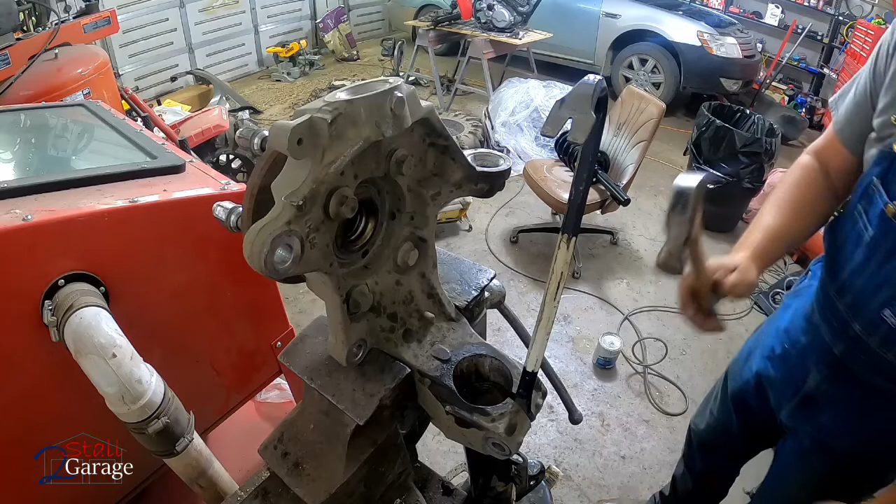All right, there we go. Woo! Oy vey. Let's see if I expanded it out. Well, I don't know, looks fine. All right, I don't know if I said this to you guys, but I'm sorry about the lighting.

Only goes in one way, thankfully. Got your tab on this side here. All right, goes all the way down. Perfect. And you got a tab on this side that stops, so you know how far, it's right here. Just know how far to go down.

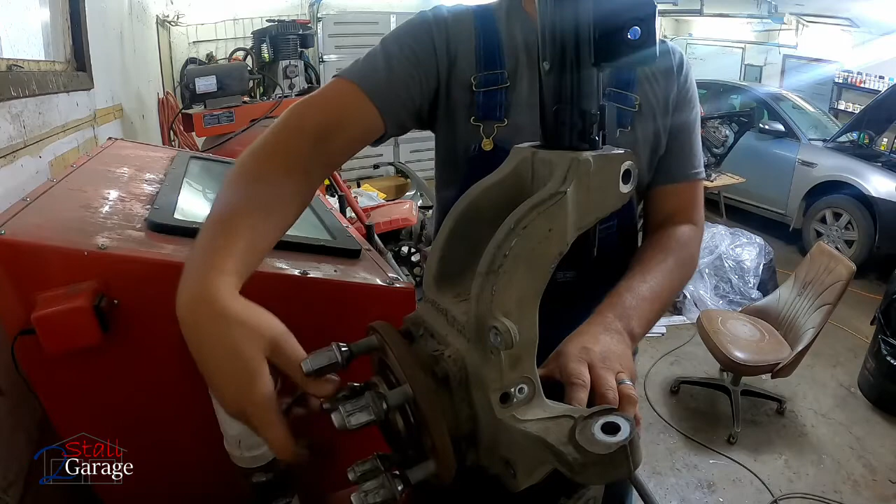So with that said, I wish I had a new hub to put on this. It's not bad, but it could stand to be replaced. Everything's so expensive, we're gonna roll with this. It'll be okay. You're gonna go, yeah.

So get yourself a little holder right here. It's gonna go on the right side as your hub's on the outside. All right, this is a 21. And I'm gonna zip it down and then I'm going to hand tighten it down, to the torque setting.

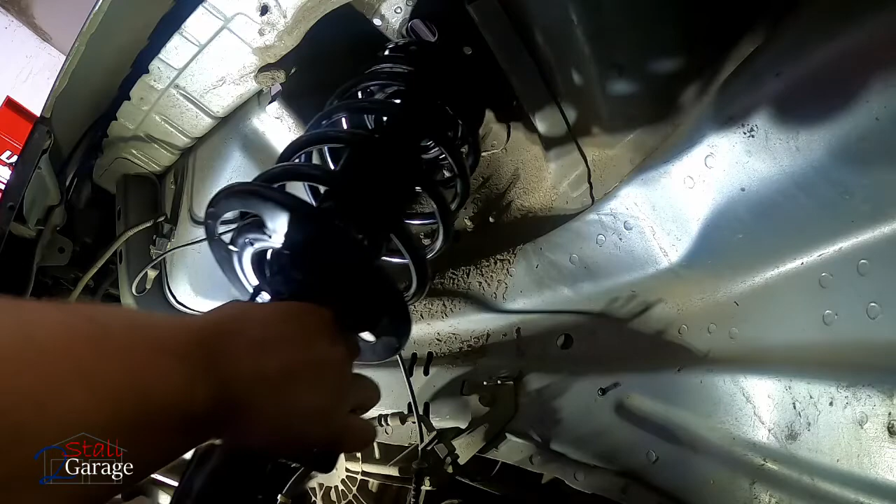All right, let's take it over there. When you put these in, there's a little arrow on the top of the mount that points out, meaning the outside of the car. You guys ready? Here we go. Upsy daisy. Let's get our, man, this thing is heavy.

I'm gonna move this off to the side and I'm gonna get this in first. Okay, we're up. Let's see if I can get this to sit on something. Stay.

We got one through, one threaded. That's what we need. Get one threaded and we can start to get this thing lined up. We got 3 poking through. Now I'm not going to tighten these down up top here. You probably can't see it, but I just got to get a couple of these on there.

Okay, you didn't see any of this, but up here, I've got these run through. A couple are tightened down pretty well, the others are not. And that is just to hold your spring in place.

And now what I'm going to do is I'm going to get the lower ball joint connected to this. Getting close there. There we go. Watch your fingers when you do that.

Oh yeah, much nicer. Okay, let's go ahead and get our bolt on here. Oy vey. Yeehaw, look at that. Listen to that thing. Not great.

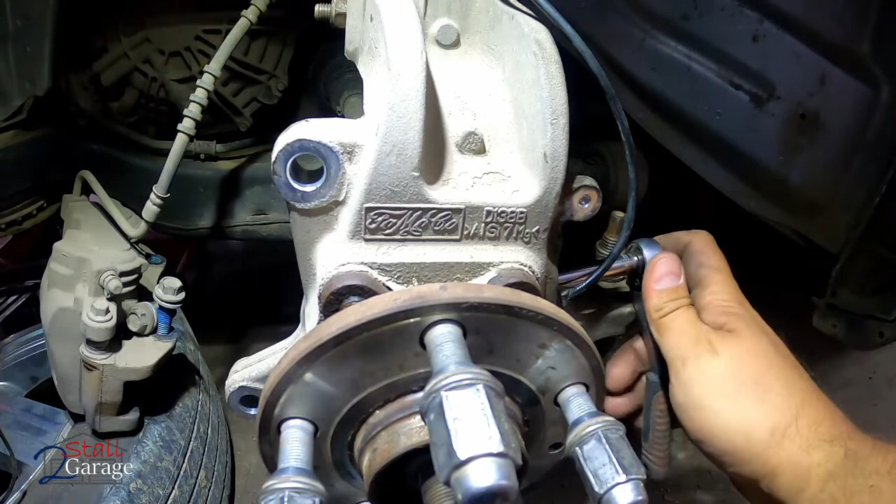Let's see if we can get it to go through. Once this is tight, that's all you need. That bolt will break with no problem. Okay, so we got our tie rod end on.

We're gonna have to just push down on this a little bit here to get the sway bar link to line up. So while I'm pushing down on it, I'll just push it in. There we go. I'm just gonna slowly crank it.

Maybe keep it from spinning until the end at least. I can't remember if this one came off hard or not. That's last night.

There we go, done deal. What's next? We got the rotor we got to put on. I'm going to put just a little bit of anti-seize on this.

Just a few drops make all the difference. I'm sitting here crisscross applesauce, by the way, just so you know, real life type stuff for us anyways. Let's make sure our hole lines up.

There we go. Where'd the 18 go? Here it is. There it is. All right, get these going on. Make sure we're going the right way here.

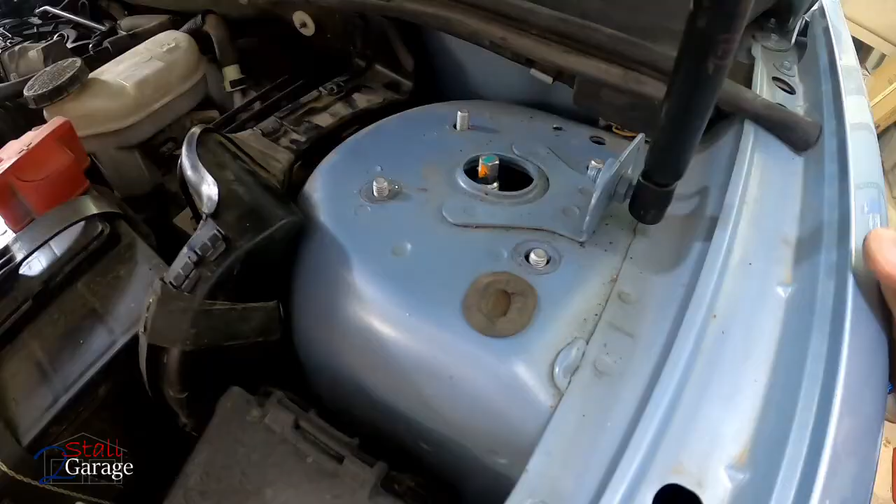These are all just snugged up, but we're going to torque those once the tire is on the ground as well. We're going to torque these to 100 foot-pounds. But before we do anything, we need to make sure that these are not tightened down.

I am going to put the nuts on. Let's see here. Can we do that even? We can do that on these. Not on that one, apparently.

I just want to have one nut on just so nothing weird happens - it keeps it aligned. You don't ever want to have these torqued down or tight until you put the car down. Reason is because it can cause problems with that strut mount on top here.

So I've got this one on just a little bit. It's not torqued down or anything like that - actually it's tighter than I want it to be. They're a little too tight there. There we go. Okay, dust shield's not going back on.

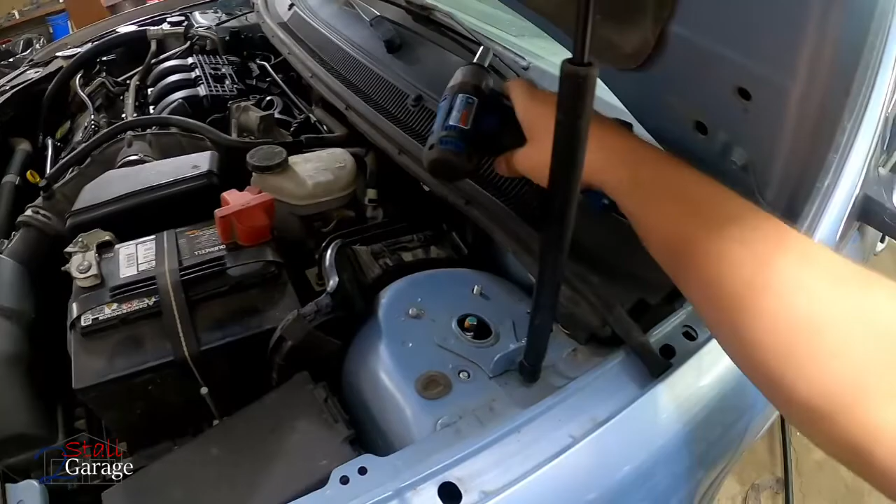We got this sway bar we got to put on, but we're not going to put it on until we get everything on the ground. So let's lower it down here. Here's our transmission fluid leak - got to fix that sometime.

You want to replace these in pairs, which is what we're going to do, but for right now we got to get going. So I'm going to button these up. We're going to put that crossbar back on, and I'll be right back.

All right, we're just throwing the center cap back on. The spindle nut for the axle is spec'd out at 184 foot-pounds.

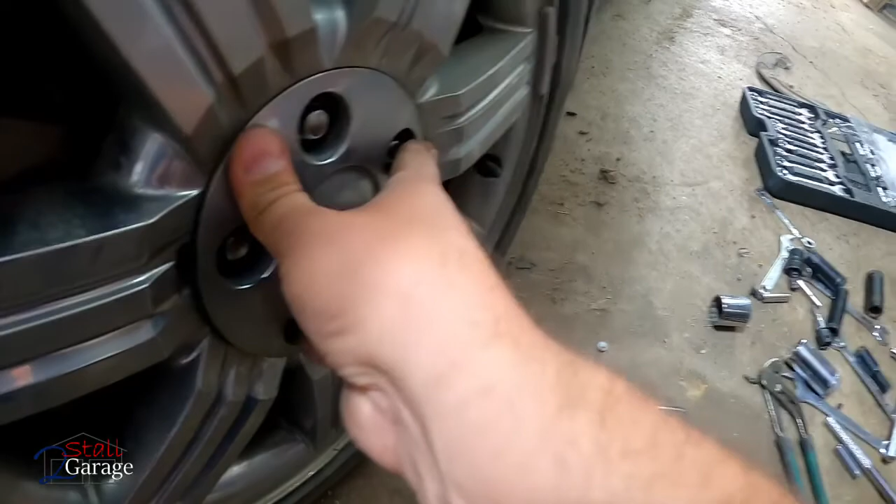There we go, we're all done. New strut tower, new strut mount. And now we got to do this side next, but I won't bother you with that.

All right, just want to say thank you guys so very much for watching. Taurus is out of the shop. We got that other shock and strut assembly replaced. Everything is good, no more clunks. The AC is working very well.